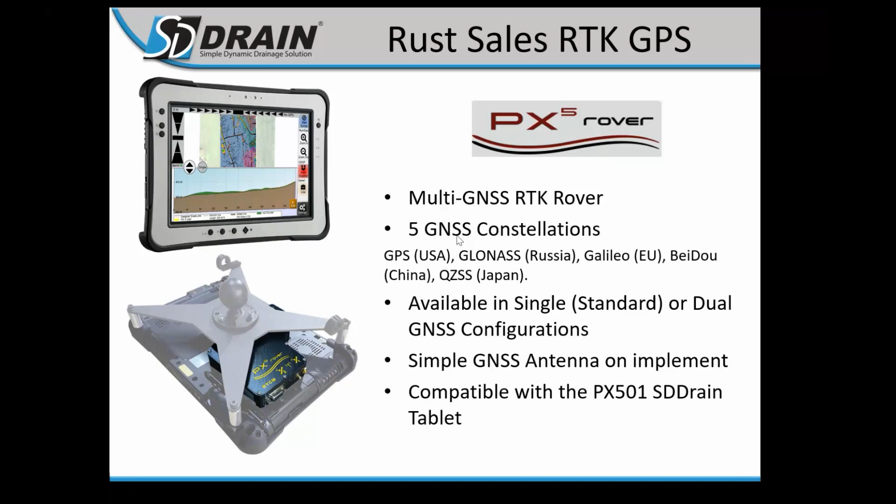And then it also comes with a Rust Sales base station, which would be a unit that you would bring with you to the field that you guys can set up just to ensure that you guys have the best GPS signal available to you. And this is unlocked for the life of the product. So there's no subscription fees when you guys are trying to get your RTK signal. So again, if you want to check it out, go ahead and ask your dealer. And it is the PX5 Rover and base.

Rust Sales support tools. We have manuals.rustsales.com and also sddrain.com. These are two websites that we have put together. There are support pages on each of them to help you guys if you need quick reference guides, cheat sheets, how to connect guides and stuff like that for connecting your equipment starting up. Or if you guys are new purchasers, there's lots of resources on here for configuring your globes, running cables, where to mount stuff, and things like that.

We also have remote support. This uses an internet hotspot if you guys have hotspots on your phones. So be sure to check that out. And it really helps us out if you guys can get your phones connected to your tablets. And then when you guys call in for support, we'll walk you through how to get us logged in. That way we can take a look at all of your different settings.

If you have questions on the program, if you're doing things right, again, we can log in and actually take a look and see exactly what's going on your screen. And we can actually click around and make changes without you having to touch the screen. So it's something that's been really helpful for us.

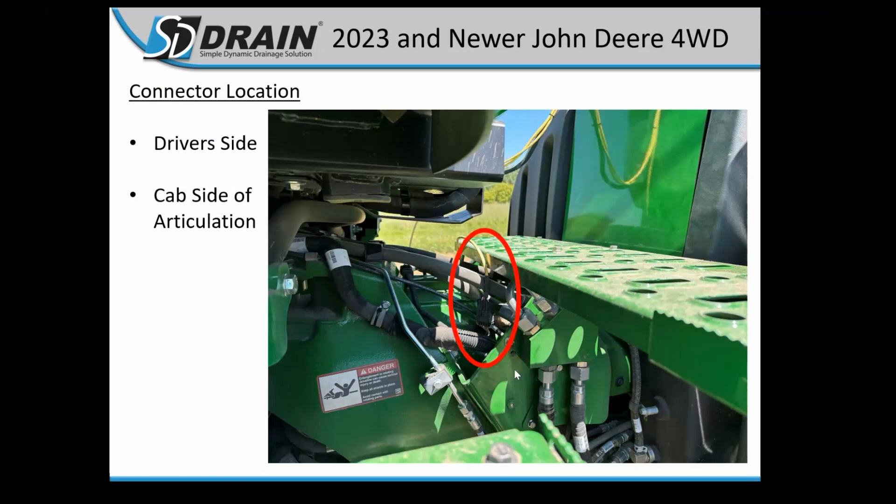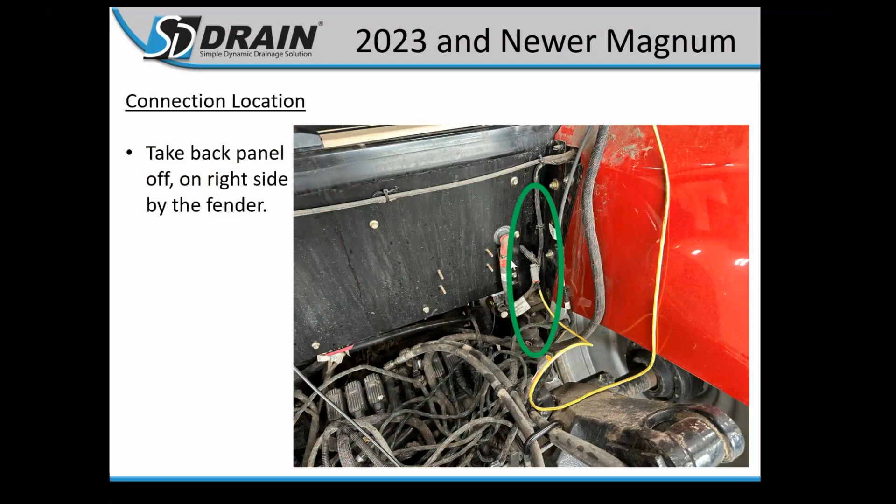2023 and newer Magnums, again, on the back of the tractor. So this would be more for guys pulling smaller plows, still being able to use those bigger horsepower front wheel assist tractors. Take the panel off on the back of the tractor, and you'll find this connector here on the right side. Notice they've taken all of the electronics out. So take that panel off, and you'll find that connector right about here.

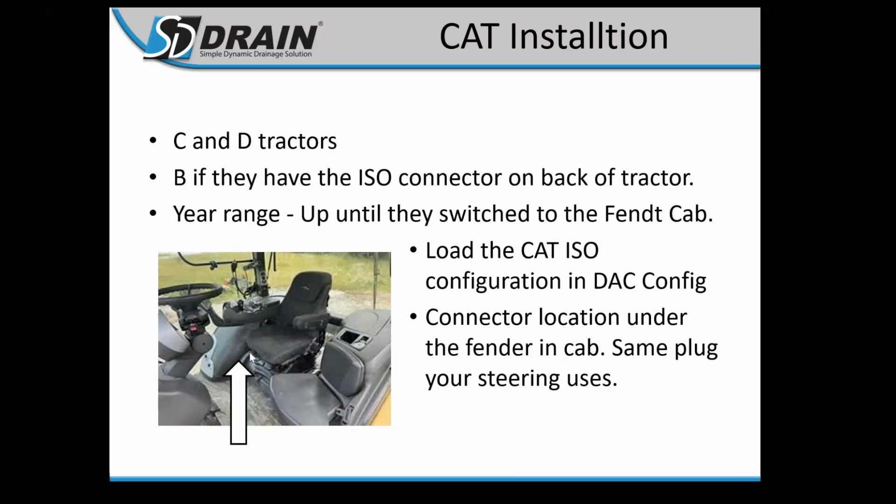Just a reminder too, when we're at this spot, there's the John Deere 7000s and the 7500s. We've heard that there have been dealers pushing the satellite RTK, but even on John Deere's website, you're not supposed to use that for tiling or for water management. So you'll need a base in the field in order to do that. So your 7000 and 7500 would need to have a radio on it, and then you would have a base in the field. But the settings would be the same for the John Deere GPS configuration as they are with the 3000 and the 6000. Yeah, that makes sense.

And another reason we've got a solution for that is you guys are losing your John Deere tower networks. Again, that PX5 rover that we talked about earlier is a good solution for you guys as a standalone kit for your ditching and in this case, tiling. That's just something to talk to your John Deere dealer about.

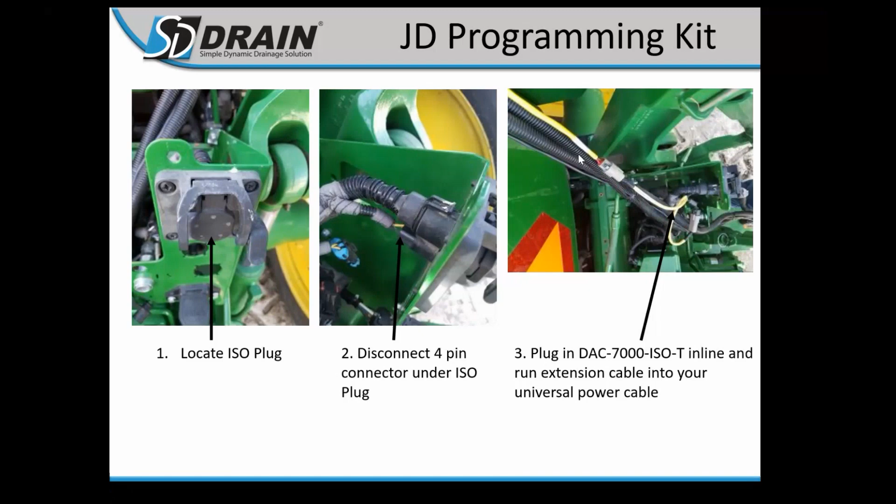Again, it plugs into the ISO plug on the back of the tractor, and an extension runs up into the cab and plugs into our main power harness. What you'll do is go on your 2630 or John Deere display, make the changes to your receiver, configuring your radio channel and network ID, and then you can go ahead and unplug that cable from our main harness. So it's a temporary connection while you're programming, and then disconnect it so that way you can use your steering.

You'll open up Ag Remote on your computer, hit File, go to Connect, and then honestly, the easiest thing to do is to follow the instructions that we give you on manuals.rustsales.com or SD Drain Support, and then go to the Support tab. It's a lot easier just to follow the cheat sheet page than it is to try and talk you through it in this seminar.

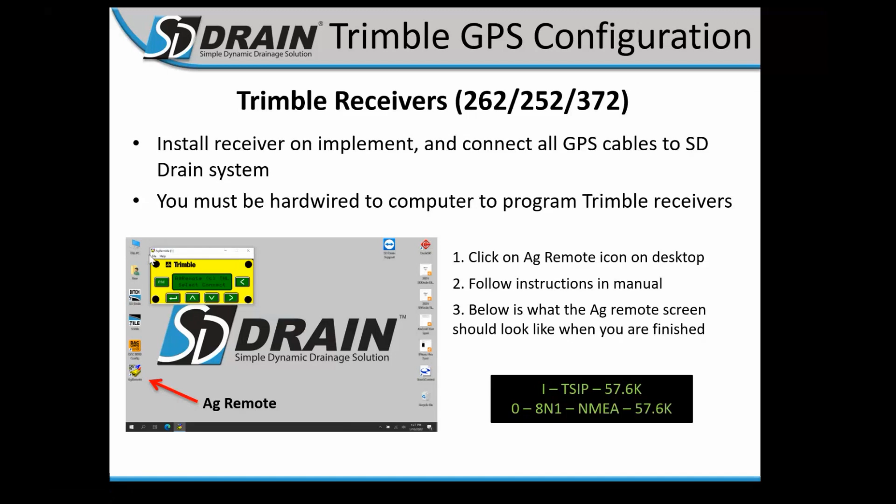Ag Leader 6500 and 7500 receivers. Again, these are a little bit like Trimble. You have to hardwire to our computer to configure them. There is a page that will show you exactly how to configure these globes. So for the 7500s, you can actually connect to them with your phone. And we need to do that so we can switch the baud rate. That way you can connect to it with our computer.

And the reasoning is these receivers default to a really high baud rate that is actually not readable on a serial connection. So we need to use your phone to switch that, and then we can connect to it on our computer. The 6500s, those you can actually connect to directly on the computer. So those you'll just hardwire and then follow. Again, the easiest way to program them is just to follow the instructions that we give you on our websites.

We'll go through how to find the instructions on the website a little bit later on in the presentation. Yeah, Scott's made some pretty cool cheat sheet guides and stuff like that that you guys can use.

So starting the program, we're actually going to go into SD Drain Tile. So double click into Tile. My desktop looks a little bit different; this is my training computer. So click agree. And then the first page that you guys are going to come to is going to be all of your file maintenance. So this is you guys keeping track of what field you're installing in. I've got grower, farm, and field on the left side. You've probably seen this in other software packages from different manufacturers, so hopefully it looks somewhat the same to you guys.

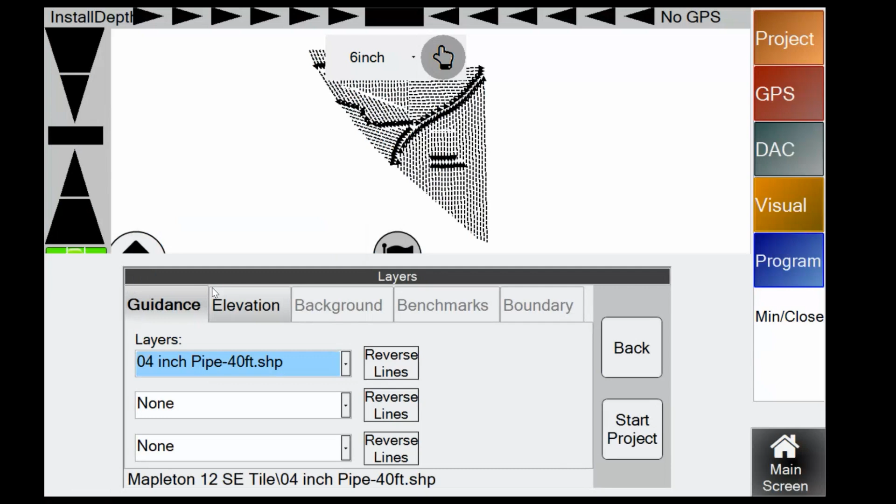I'm going to go to the elevation tab, and I'm just going to load the topo map for this. And then on my background, you get a whole ton of stuff here. We'll just do the flagging. So it kind of gives you some information on what's going on with each of those installation points. And then I'm going to hit start project.

There's errors here because I don't have certain things turned on. So give me a second here. I'm going to disconnect my GPS, and I'm also going to disconnect my controller, because it's searching for them. So that's why we're getting those errors.

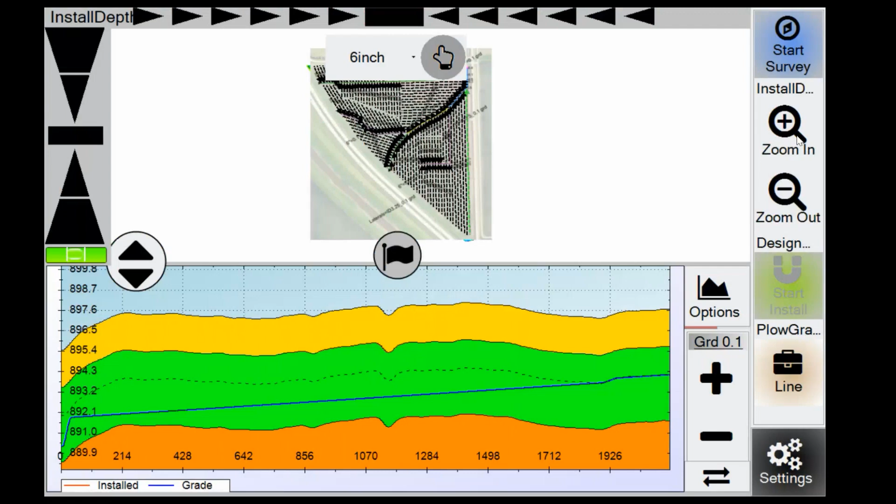So this is our overhead map. This is what tile looks like. If I zoom in here a little bit, you can see all of the different runs that are laid out in this tile project. So we're going to kind of go around the screen here, and I'm going to show you what buttons are. In the top right corner, we have Start Survey. This is the button you're going to press at the top of the run.

So you always survey from the top down towards the main, and then you always install going away from the main. So you kind of get in the loop once you guys start tiling. So Start Survey, drive to the main, hit Stop Survey, turn around, put the plow into the ground, then hit Start Install. This is your Start Install button. That's what's going to enable the screen to control your plow.

You're still going to have to most likely enable the tractor side. So for Case tractors, that's the 1-3 switch or those gray keypads. And then also for John Deere, it would be just clicking your number 1 SCV, depending on your plow. So number 1 SCV into detent to get it to go to auto. Or if you have a dual control plow, you would do number 1 and 3 to enable your hydraulics.

Above that, zoom in, zoom out. You guys saw that. It's pretty self-explanatory. Here's the options button. So we'll just kind of work around and go through the different buttons. I guess I skipped line. We'll go to line menu first. So if I click on line menu, this is just all the file management of every run. So it's going to be surveys, installs, and in this case, there's a G up here for guidance.

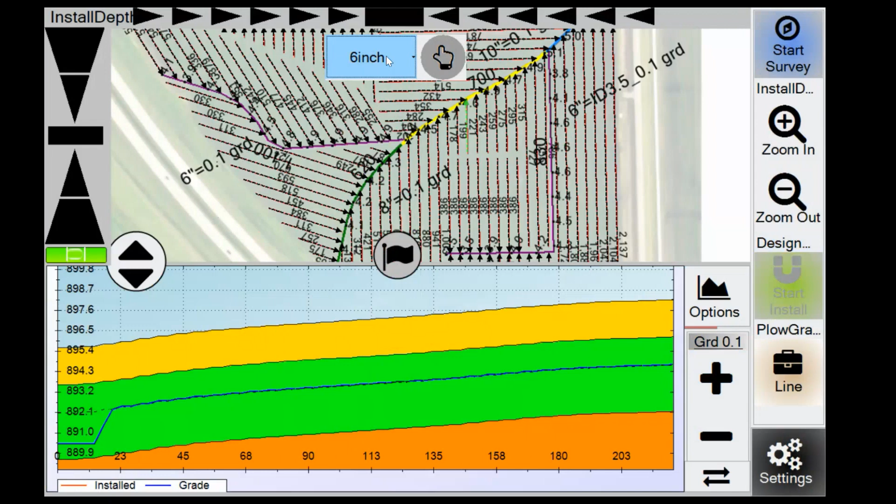What's cool is that when you're in the middle of a run, if you're changing tile sizes as the run is going on, you don't have to stop. All you'd have to do is click on that button and switch the tile size as you're still installing the tile. So that's a cool part about having that button right up in the center of the screen. And another thing too, if you want to move this around, this finger-looking hand here, you can grab it and drag it off to the side, just so it's not blocking your tractor icon or your plow icon on the screen.

So options, edit. So if you guys are wanting to change some parameters and it only associates to that run, you can go to the edit window, and now you can change your min grade, min depth, ideal depth, and max depth, all how you want it to be laid out. So if I change my ideal depth, you guys can see here how that changes my install.

I'll talk about the side profile. Let's just do it right now. So everything here in the side profile is all the information you need to know about where your tile is going to be installed and how it's going to be installed. So you can see here, the yellow is going to be your minimum depth. So this solid black line that separates the green and the yellow, that is your minimum depth, which is set in this case to 2 feet.

And then I've got green and orange where those two meet. That is going to be your max depth. So typically you'll set your max depth to the size of your plow. And then your ideal depth is going to be this dashed line that strikes through the green. That's going to be the point where you say, hey, I want to install tile at my ideal depth of, in this case, 3.8 feet. It's going to do its best to fit the line in at 3.8 feet.

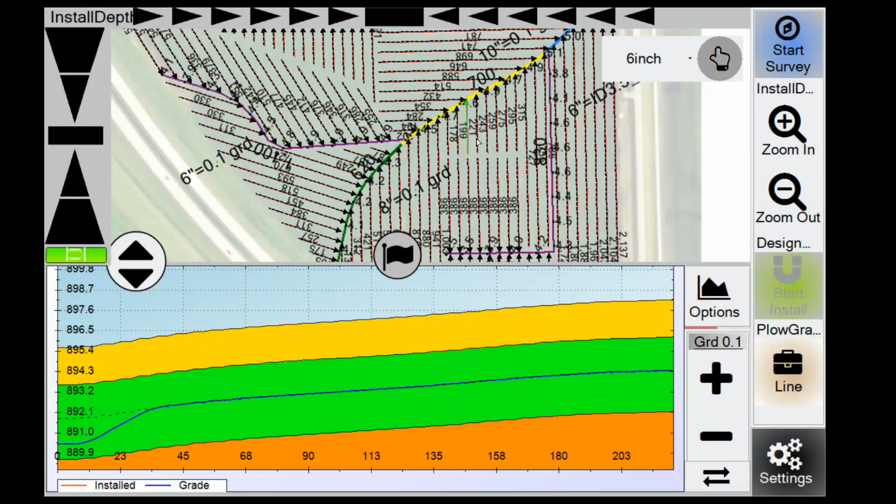And if you do a bunch of different surveying, you can change that run by simply tapping on the overhead map, just like I'm doing with my cursor here. You guys can see that. So that is the edit window. Some other things that you guys can see here, we've got graph lines that'll be displayed, target depth, install depth, and flags. That's just displaying the different things. So if you want to uncheck these and not display certain stuff, you can do that as well.

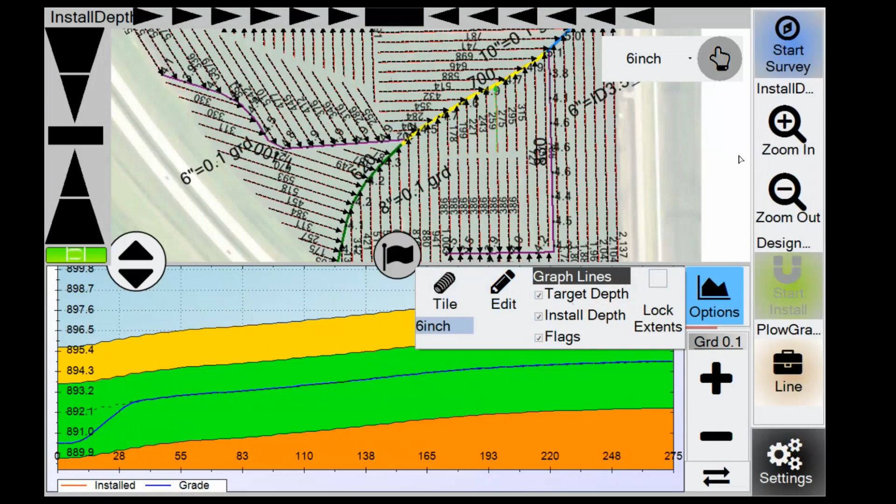And then lock extents. If you really want to zoom in and see how well that plow is controlling, you guys can check mark this lock extents and then zoom in. And what happens is, if you're really zoomed in, really close up to that tile run, the only thing that's going to be displayed on your side profile down here is the section that's displayed up on the overhead.

So you can see here, I just checked the lock extents button on. So as I zoom in, you can see that now my bottom map is changing. So as I was driving, it would just keep track of what's in view on the overhead. That is the options button.

Down below that, we have the grade change button. This is something that you guys can change as you are actually installing. So if you want to switch your grade on the fly as you're going, you guys can adjust that grade. Say you need to make up some depth or something along the way, or if you just know you want a certain section of that tile installed at a different grade, great. You guys can change that slope as you're operating by hitting the plus and minus buttons here.

Is that only changing the minimum grade? Correct. Yep. Good point, Scott. It's only changing the minimum grade. We're still going to do a best fit line to make that tile install nice and smoothly, but this will change the minimum grade of your run.

The arrows here, if you click on this, this is a pitch change button. So what it does is on Prairie plows, there's a slope sensor that is attached to those to monitor the pitch control of the plow.

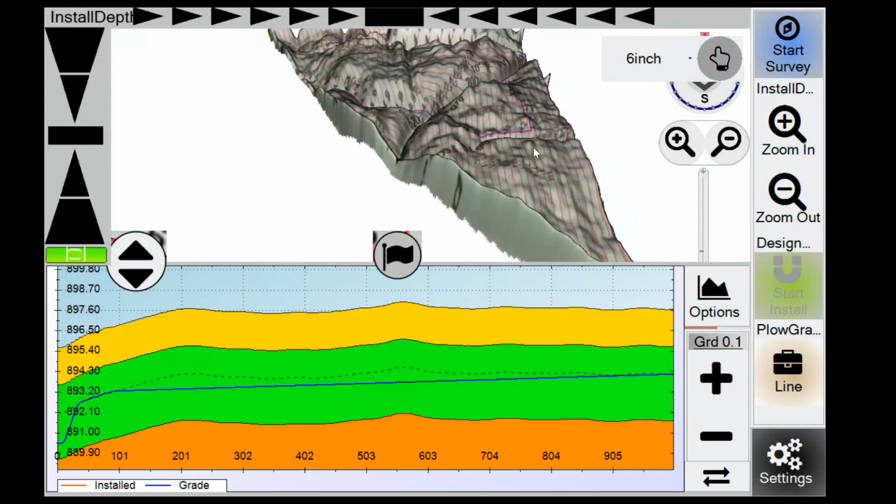So here I switched it to 3D mode. If I zoom in, zoom out, you guys can see now how the terrain changes. And I'm actually changing the way it's exaggerated with this bar on the right. So just again, to show you guys how cool things can be, or just the extra data you guys can get through getting these tile plans made.

And the thing with the 3D map is that's going to be displayed in a heads-up display. So the map is always going to rotate to be the direction that you're traveling. Whereas when we switch back over to the overhead view, it's always a north-up display.

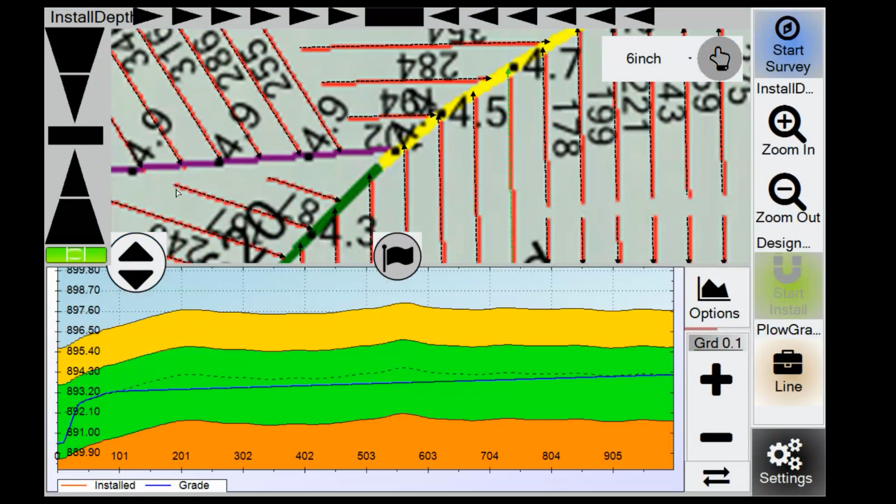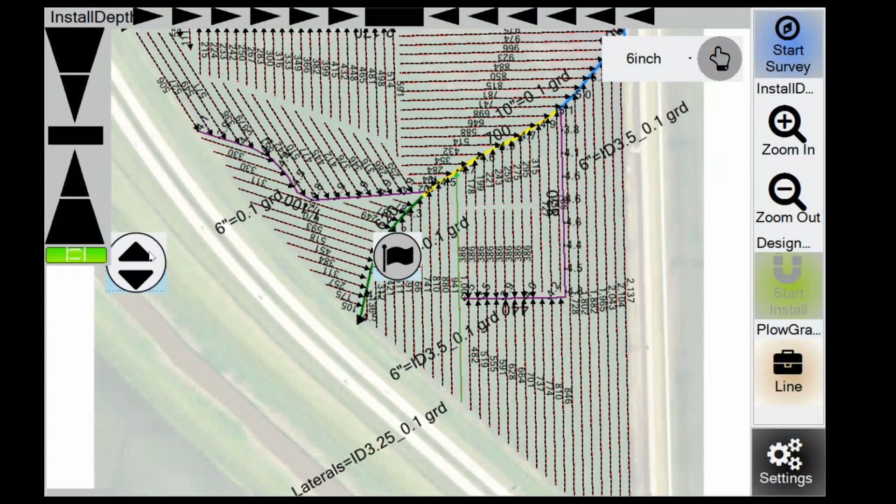So in the window button, the next thing we have is the side profile. And really, this is more for viewing. If you want to get rid of this, then you've got a big picture and you can look around and plan things that you want to do throughout the field. So again, that is the side profile, just to get rid of that. I'm going to bring our side profile back up here.

On the window button, once again, you can grab that window button and press and hold it, and then you can move it down or move it up, and that's going to change the window sizes from the overhead view to the side view.

Yeah, good point. And that's a quick, easy way. Instead of turning off your side profile, you can just slide this down quick, take a look, and slide it back up as you're operating.

So left side, there is also a bubble level. This is indicating for guys who run a slope sensor on their plow. Again, not all plows need it, but this is the slope indicator. So when you guys are trying to level your plow out in the start hole, this is a good indicator to use to tell if your plow is actually level. And actually, if you click on it, for me it's going to say no slope sensor attached or detected. I'm going to hit OK.

But normally, if everything is connected and working, if you click on this button, it's going to allow certain tractors to be able to level your plow into the ground. And as of right now, it's only going to be Case tractors and guys running external valves as well. Just because John Deere has a safety where you have to be moving for your external hydraulics to be able to be controlled. And other things like CAT as well have the same safety for movement. So click on it and it'll walk you through what to do. Make sure your plow's level or in the start hole, and then you press and hold OK to level. And I have a video to show you guys what that looks like.

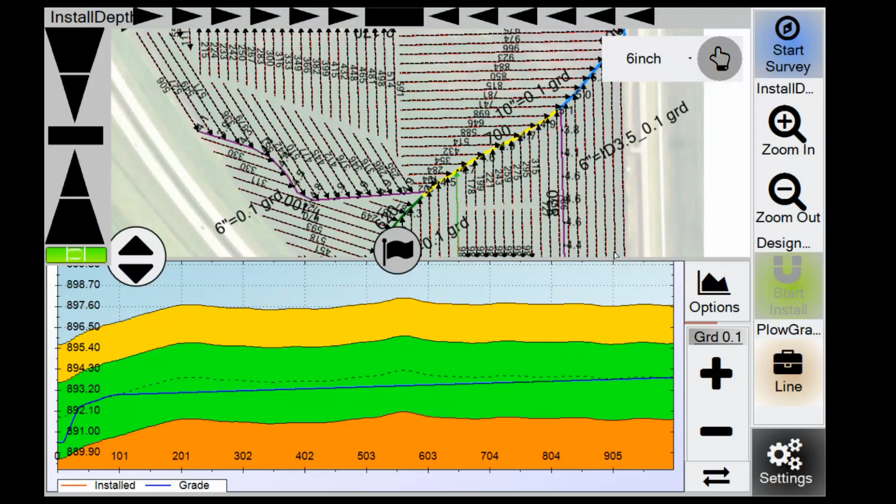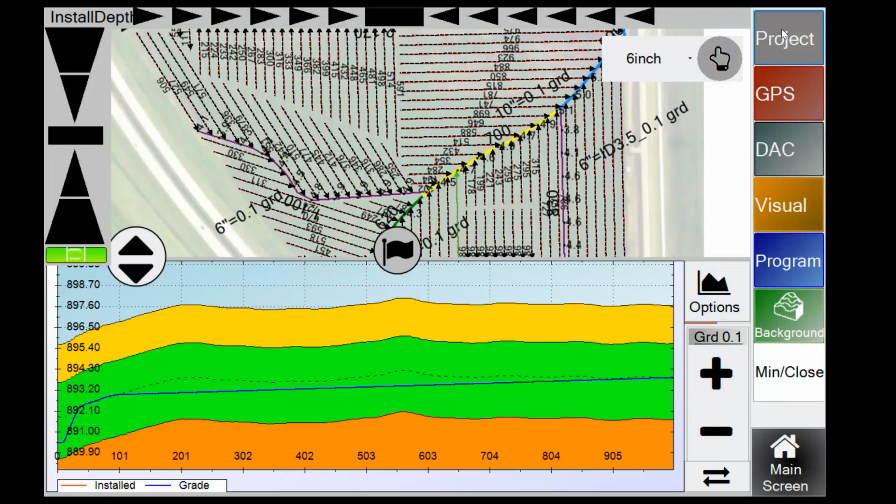Next, we're going to go to settings, and we're going to go through these. I'm not going to do everything because some of it isn't so much related to just everyday users. A lot more of it is troubleshooting that we would walk you through over the phone. So the first thing is project.

There's save load settings. If I click on this, it's going to bring me to a page where I can actually save the parameters for each plow. If I've got a couple plows that I run on my farm or in my operation, I can save those parameters, like all of your implement measurements, all of your install depth, stuff like that. You guys can save all of those in here and then quickly load them when you need to switch between those plows.

Next is going to be layers. So if you guys want to switch and add different layers when you're installing, in this case, if I wanted to get rid of my 4-inch pipe, I'm going to go none. So now you can see it's a blank screen, or the guidance lines have been removed. If I do my 10-inch pipe, you can see here it just added only my 10-inch pipe.

That way you can see exactly what needs to be installed and you can separate what's what, which works really nice. So if I want to get rid of that, or if I just want to switch it, I'll go 6-inch pipe. So now you can see that is the only 6-inch pipe that I need to install on this plan. We'll go back to the 4-inch just because it gives a nice picture. So that is the layers tab. We'll go start project again.

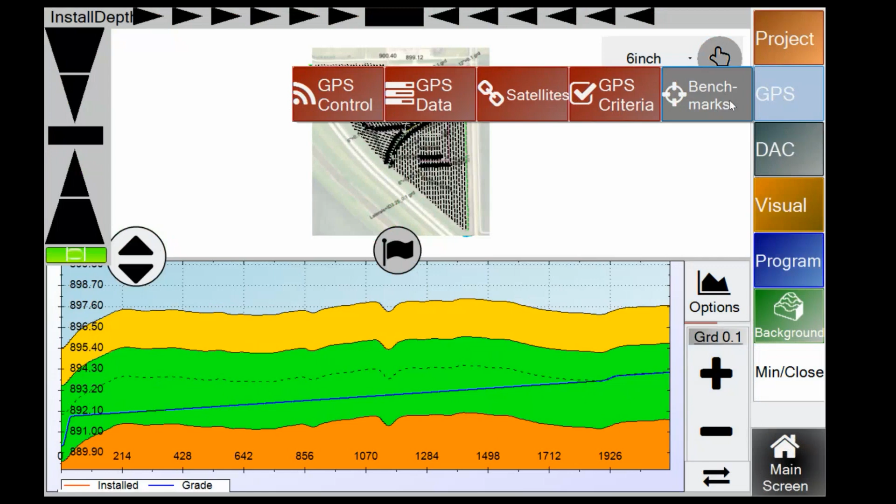Okay, so settings. The next one down is going to be GPS. Benchmarks is the first one on the list here. So we're going to click into benchmarks. When you guys start a tile plan, you kind of got to think about the future. So the best case is that every field will have a benchmark, and every field you'll be able to park in the same spot every single time to correct off this benchmark.

And a benchmark is just a spot in the field that doesn't get disturbed every time you do tillage, something that's going to be consistent year in and year out that you guys can use as a reference to correct your GPS. So go someplace in your field where that is consistent, click add new, and it's going to drop a benchmark where your plow is sitting. Again, like what Scott talked about, the GPS on your screen up here is where your plow is sitting and not your tractor.

So when you come back, I'll just give you the quick rundown on how to use your benchmarks. Let's say you're done for the day and you want to go home. You can park your tractor in this location, hit add new in this benchmarks tab. You're going to see this progress bar load, and then it will drop a benchmark, and you'll see it in the list here, but also on the overhead map.

I would park your tractor, just leave your tractor right there, do not move, and in the morning you'll come back, start everything up, get RTK GPS coming in, and then go to your GPS benchmarks tab, select that benchmark from the list, and then hit start correction.

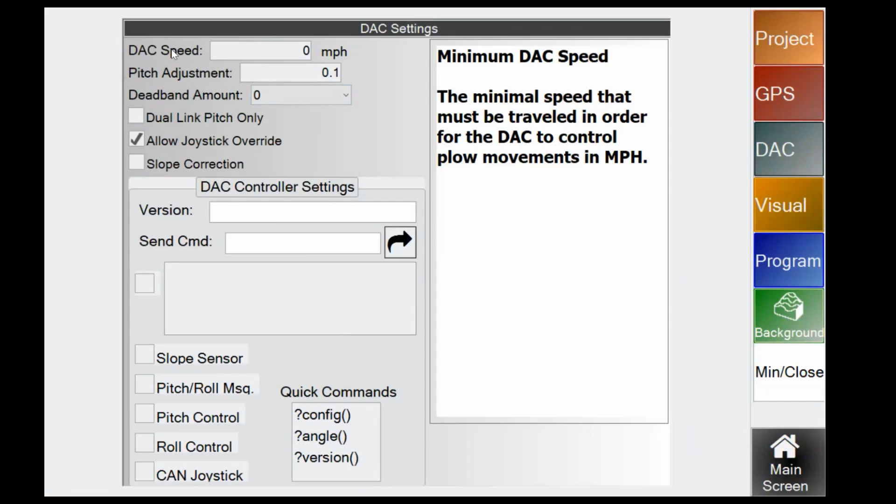Next portion is DAC. We've got DAC config. I'm going to go through that a little bit later. I'm going to go to DAC settings instead. So DAC speed, all these are going to be dependent on what type of plow you're running and what hardware you have to turn on. Starting at the top here, DAC speed, again, is just the minimal speed in order for us to control the plow.

Pitch adjustment: since your plow is running at a certain pitch through the ground, if you need to raise and lower the pitch at which it runs, you guys can change that here. Again, that's that same button that is down below in the arrows here. So this is the same pitch adjustment that you would be doing in DAC settings. And then deadband amount, we recommend changing this to 0. So if you guys haven't checked this out, switch this to 0.

Dual link pitch only is going to turn your Crary, and I use Crary as an example, into a pitch control plow. Where we see this used is in rough conditions, like extremely rough conditions. What you do is you actually float your elevation cylinders, and then you only use your pitch to control the depth that it installs. You have to check mark this on. So you'll float your main lift and then enable your pitch cylinders.

Allow joystick override. This is for guys running the external valve. When you guys click lift, or you click a button on the controller, it's going to shut control off and allow you to raise that plow out of the ground. Slope correction, you guys can just leave that unchecked. You won't need to worry about that one.

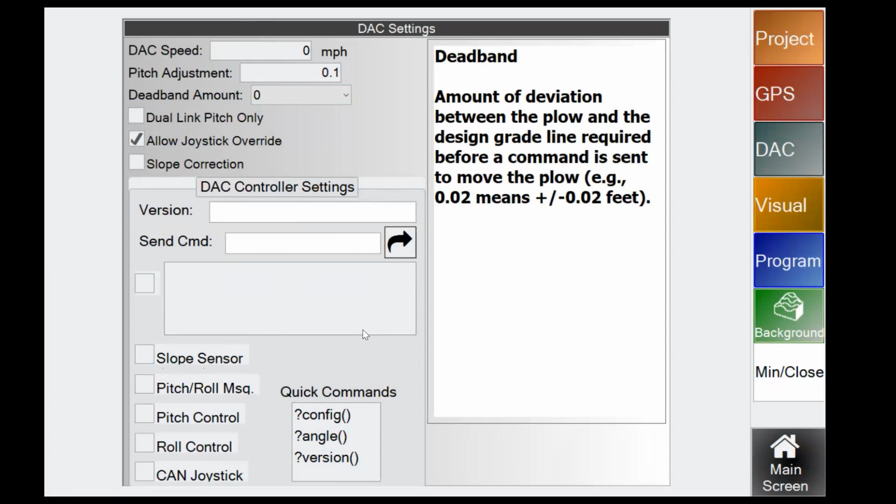DAC data, again, this is all related to the slope sensor that is connected to your machine. Again, if you don't have a slope sensor, like guys running Soil Max plows, we don't need them for those. You'll have a bunch of pitch and roll data coming in. DAC Control, for guys running a typical standard setup, again, you'll most likely be set up wireless.

If you have to hardwire the controller for some reason, and most of the time that's going to be in troubleshooting times or whatever you want to call them, where something is not working right, you guys can wire your controller as well. So there's a serial connection up here.

Next thing is going to be visual. So flagging and logging, check mark the show manual flags button like we talked about before, and then you guys can name what you want these flags to be labeled as. Down below that, we've got enable visual logging. If you check mark this on, what's going to happen is SD Drain is going to start recording all of the data for wherever you drive in that field.

And this is more of a data recording feature, as you can see here in the explanation on the right. It's more for guys if you want to survey that field and then get a tile plan or a topography map made. We use LiDAR. So if there's LiDAR in your area, most likely we will use that to create that tile map.

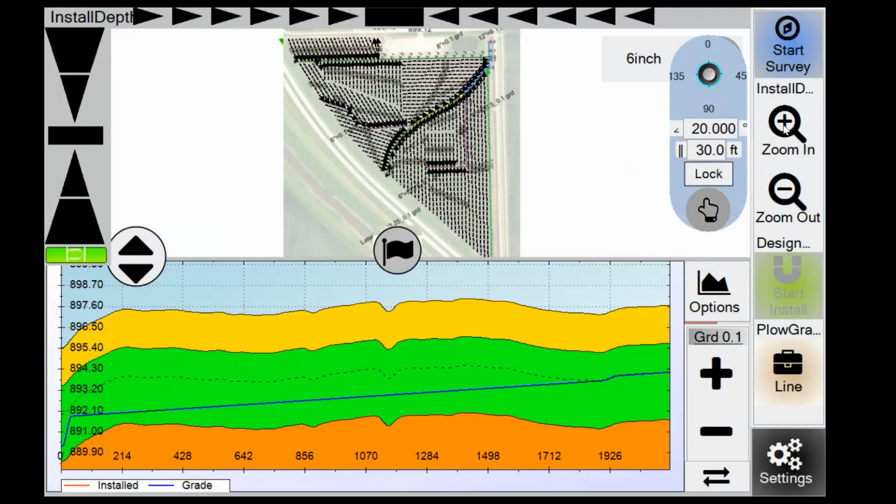laid out plan. And I'm going to kind of go off the path here. So we're going to use this open area as an example of where I might use this. So let's say I don't have a plan. I don't have any of this, but I know that I want to do some sort of pattern tile. What I can do is zoom in a little bit more.

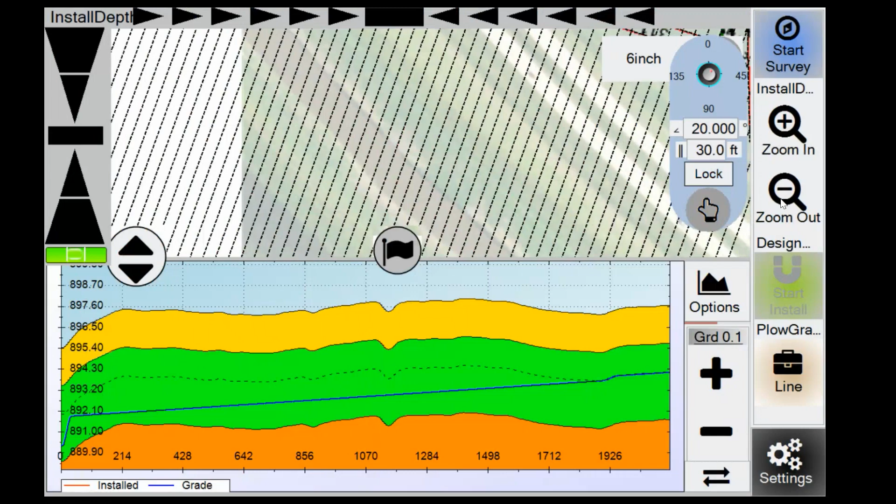So when you're zoomed in at the right zoom level, this will display all of your guidance lines, grid lines. Yeah, grid lines. Yep. So as you zoom out, those will actually go away and you'll get a better picture of your map.

But if you zoom in, you can see here now, I'm going to set this to, let's just go 90 degrees, hit enter, and then I'm going to do, let's do, I don't know, 25 foot spacing. So now those lines are a little bit tighter.

And actually, what you can do now, let's just say this line is not exactly where your cursor is sitting. Well, if you drag this thumb thing around, it will actually move those tile lines and you can more precisely place your grid lines. And now you can use this as guidance. So, well, not like auto steer guidance, but actually a visual that you guys can follow as you're driving.

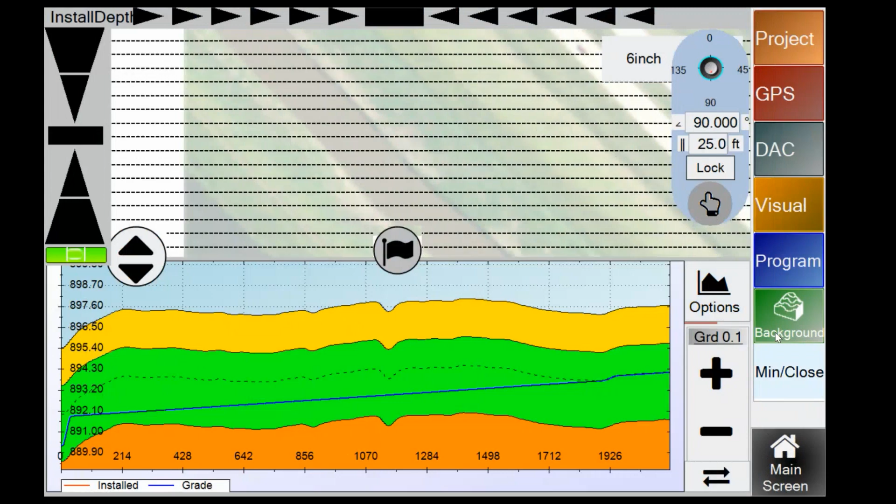And once you're happy with where those lines are showing up, hit this lock button right here, and it's going to make that menu a little bit smaller, and it will lock these lines where they're placed. Click the thumb to pop that window back up if you need to change anything. That is the Show Grid Lines button.

Next, we have the indicator bar, and this is talking about that left side indicator bar or the vertical indicator bar, and also the horizontal or the steering or guidance light bar. Don't change any of these values. That's all I got to say there. Don't change the auto level range, and then control and work screen, keep that checked.

Colorblind friendly option. This will change the red, green, and yellow indicator colors to a grayscale. So if you check mark this on, everything that indicates in color will just be a grayscale to make it hopefully easier for you to see.

Then we have graph. So here we've got, again, all dealing with colors. So here's the example below. If you don't like the way your min depth is laid out, you can switch this to red. So there now my min depth is going to be red, and so on. So however you want your map to be displayed, you guys can click through here and change the color scheme.

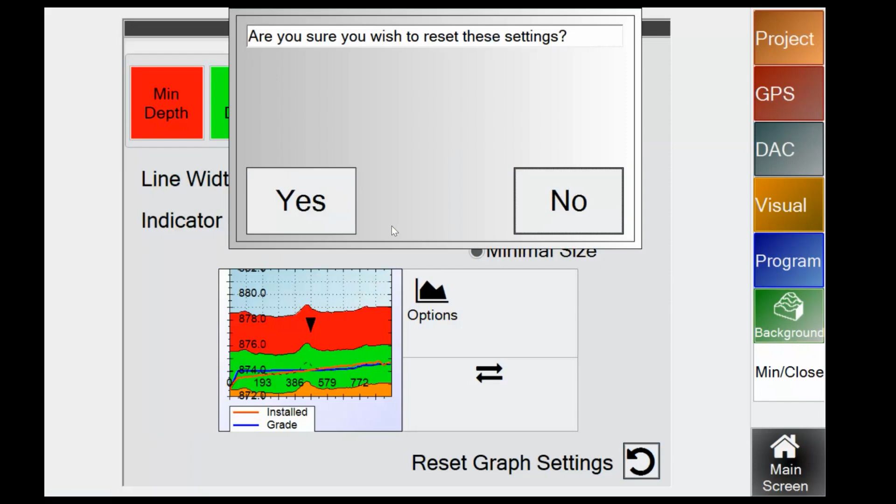Also lines, you want thicker install lines or indicator size on the bottom map, you guys can change that as well. I'm going to reset this back to defaults. So another nice thing is that if you ever screw something up, there's a reset to defaults button on most of the pages in SD Drain. And that is going to be this little circle right here, or the reset button on the bottom right.

Next, we have program, and we have export. We're just going to go through this here. So I'm actually going to show you a project that we can export. I have to open up a different project here, so give me a second.

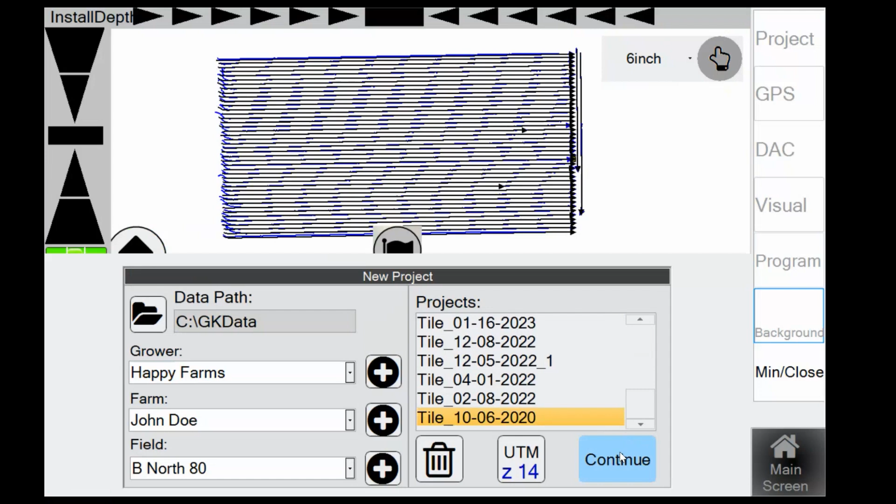So this would be an example of a project that is complete. And what I want to do is I want to print out all of my tile runs on a nice PDF for my records. So I'm going to hit continue. We'll just open that back up. I'm going to hit start project. And now I'm going to go to settings. I'm going to go to program and then export.

And then what we're going to do is click on report. This is the most common thing that guys will export. It is just a PDF report. And I'm going to hit OK on here. And what's going to happen is the program is going to go through a couple things, and then it will generate a PDF report that you guys can hand out to your customers or just to keep on the farm. Hit OK. And now it's going to open up.

So I actually created a PDF report here of this field before. So I'm going to click on this dated one here. So tile report. This is your PDF, B North 80 tile report. Double click that open. And now you're going to get a nice printable version of your field. We've got the grower, farm, field, the date that it was completed. And now if we scroll down, we've got a nice overhead view of what's going on.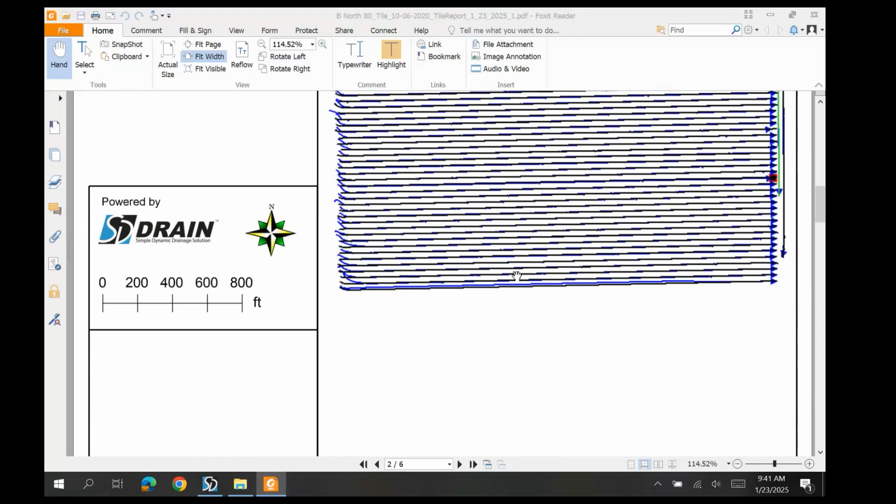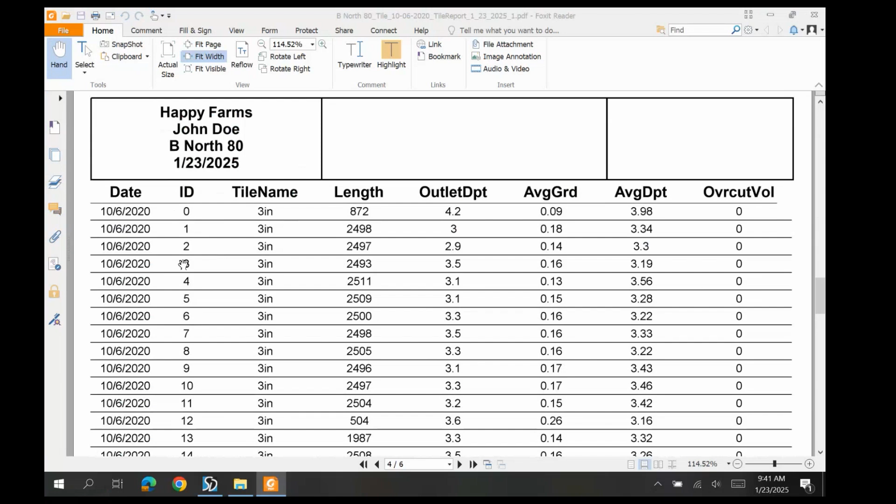Go down even further. Well, the date that the report was generated. Yes, correct. And then down below here, we can see a little bit more information. Our tile name, 3-inch length. We did 43,368 feet on 10.6, and on 10.7 we did more 3-inch, and we did 66,000 feet on that day. And then if you keep going down, you'll get more information about each run, and there's IDs associated with each run. You can see the length, the outlet depth, average grade, average depth, things like that.

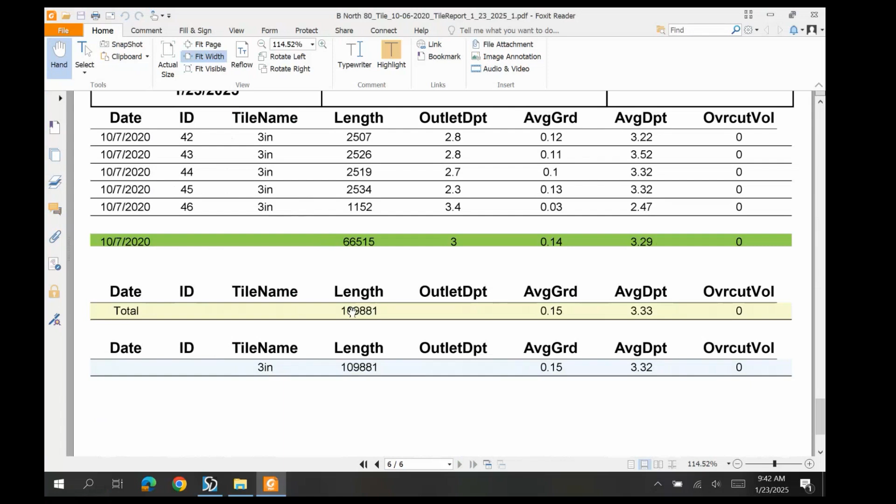So there's 10.6. Keep going. Here's 10.7. We did all these runs. So you can see we've got some longer runs in this project. And if you keep going down below, it just continues on and then shows you the total lengths of each tile size that you did. We only did 3-inch, so you're only going to see the 3-inch displayed.

So there is Tile exports as a PDF. The other option that you guys have is going to be export, and it's going to be the project. And there's something else, so you can actually overlay all of your runs on a Google Earth image. So if I go project, I'm just going to hit OK, and Tile's going to do its thing to generate or to export all of these different files.

So now you can see here we've got an export, so it'll pop up an exports folder. And now inside here we've got what are called install tile layers. So this is a KML file that will actually open up into Google Earth. So if you double click on this, it's going to open up Google Earth if it is installed on your computer, and it will actually just lay all of those tile runs on the globe or on your map here.

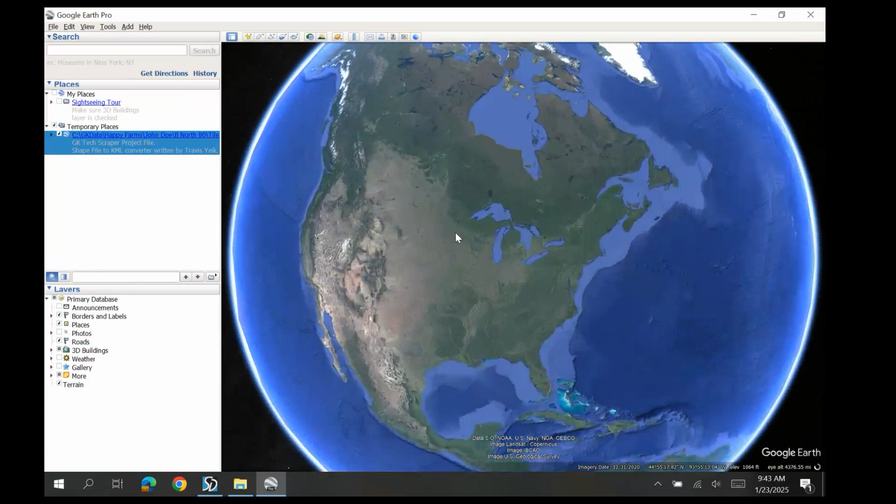So now you can see in this project, we've got all of our tile runs, and there's some tools, and you'll have to go through this and change the things and move it how you want to see, but I can zoom in, move the map, and stuff like that. But this is all Google Earth stuff that you guys can do. I believe you can print it off too. There's a print button up on top here.

If I click print, now it will actually let me label it, and then I can just print out this whole map for my records. And you can move this map around and get it however you want it to be in your printout. You guys can move that. So save it as a PDF or print.

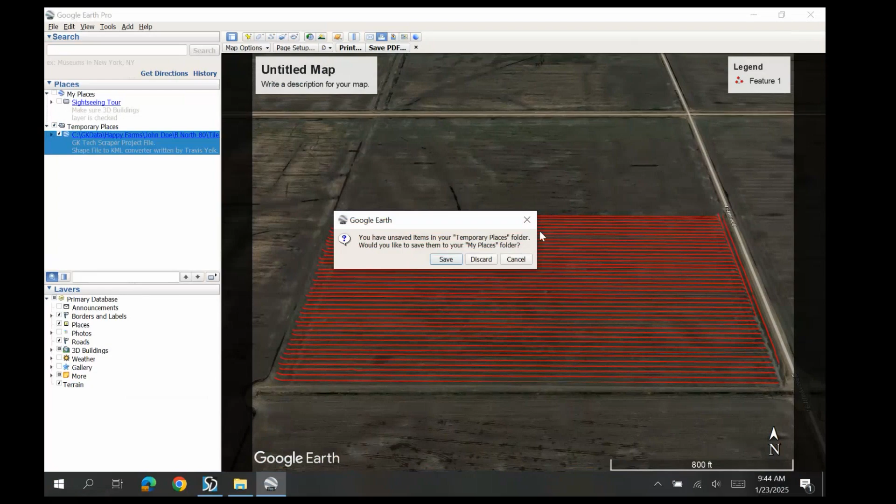I'm going to close Google Earth. I'm just going to discard it because I don't want to save this. Then close this as well. So I'm going to get back into my other project here. Then I'm going to hit continue.

So program support is going to be the next tab over. Again, this is when you guys need online help or us to log in. So if there's an issue with the program, it's usually easiest for us to just take a look exactly at what's going on. Go to this page, hit online help. And it's going to bring up a TeamViewer window that'll have an ID and a password for us as long as you are connected to internet. That's the main thing. So get this computer connected to your hotspot or an access point, and then we'll be able to support you better by actually logging in to your screen.

Check for updates. I should go over that. This button is for updating each year when you guys update your Tile programs. Connect it to internet, click check for updates, and it will get you the most recent version of Tile that has been released to the public. This number on my computer, you probably won't get this one just because I've got other versions, but just click check for updates and it'll get you the most recent.

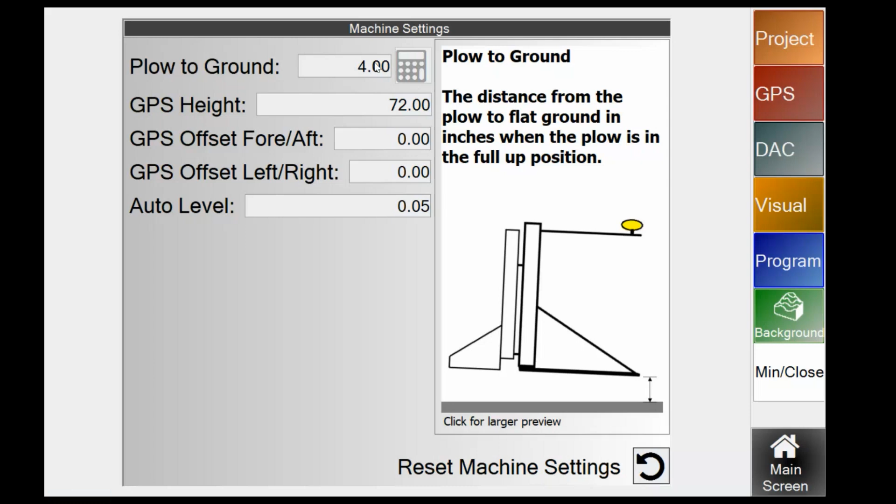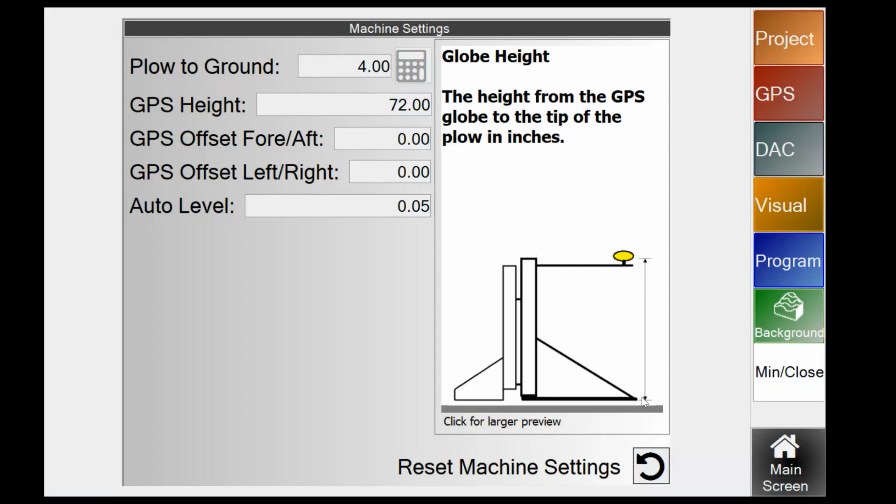Most of the time, like prairie plows, most plows are going to be anywhere between 5 inches and 10 inches off the ground for this plow to ground. GPS height, measure that in. It shows you exactly where to measure. So from the globe down to the tip of the plow. I usually drop the plow on the ground and then start doing all my measurements. That way, if you're alone, you're not trying to get the tape measure to be exactly on the plow. You can just throw it down to the ground and take your measurement.

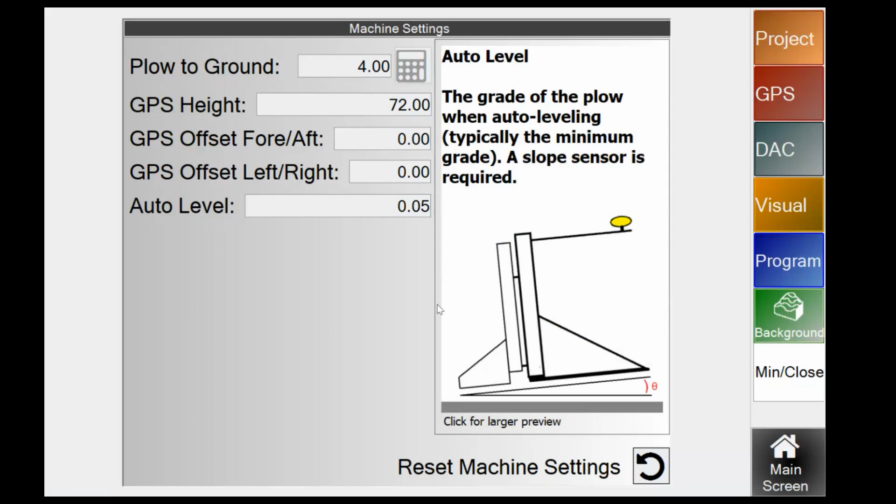Fore, aft, left and right. So how far is this globe in front or behind the tip of the plow? Here's the left and right. So how far is it to the left and right of the center of the plow where the tile gets installed? And then auto level. This is the degree or the grade that the plow is going to be leveled to when you guys are using that auto level feature.

Next is profile. And these are going to be all of your main settings. So this is where, or where and how, I should say, the tile is going to be installed in the ground. So min grade is going to be the absolute minimum slope installed on the tile. And then you've also got some other things in here like minimum depth. Again, click on it. It'll give you a nice picture. This is to the top of tile when you're setting this setting. So be sure that it is the top of tile, not the bottom.

Maximum depth is going to be to the bottom of tile at the maximum depth your plow can go. And then the ideal depth is going to be to bottom of tile throughout that green area where that tile is going to be installed to. So be sure to adjust this when you guys are switching between, say, a 4-inch tile and a 10-inch tile, because if you install your 10-inch at a 4-inch ideal depth, you're most likely not going to be happy. So just make sure that you guys check this page out when you're switching between tile sizes.

Max start distance. Yeah, I mean, that's going to automatically change depending on what tile you're putting in, right? If you're putting in like a 10-inch tile, it's going to use that calculation for where it's going in. I'm just saying, if you're putting in 10-inch tile, don't have a 4-inch tile selected. Correct. Yes, exactly. If you're putting in 10-inch tile, make sure that you have selected the right tile. And he's talking about this here. Where you're actually putting the tile in the ground could be at a different spot. Correct.

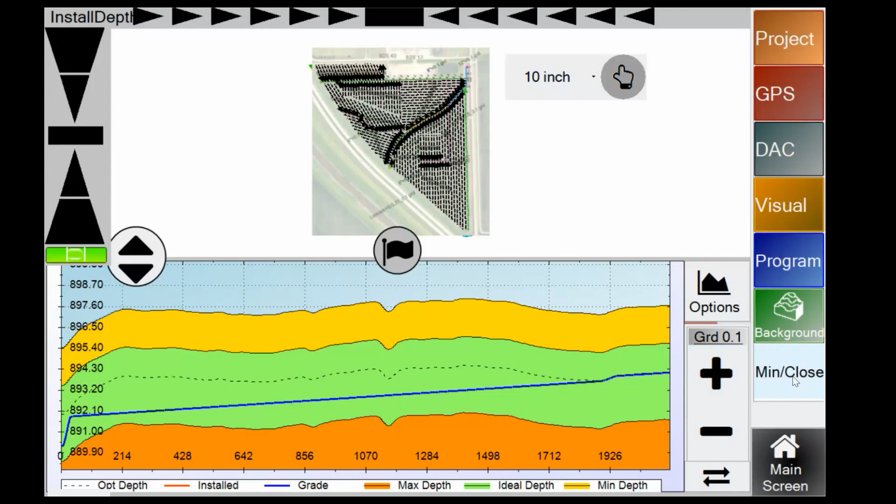And the thing too is, yes, select 10-inch here, and then also change all of your parameters according to your 10-inch tile. And most of the time, if you guys get a plan made by an agronomist or somebody else, they will hopefully give you all of this data because they have to have all that data when they build your tile design.

Max start distance is going to be the distance that we will auto generate a side profile and let you guys connect to your survey. So what happens is when guys survey up to their start hole, the plow, which is your point of survey, doesn't get all the way to your start hole.

So we allow whatever this value is, up to 50 feet, to auto generate a side profile. When you turn that tractor around, you're going past your point of survey, which we don't have survey data there. What we're going to do is auto generate a side profile to connect your start hole up to your survey.

Max elevation variance. This is the rock hit function. All it's saying is that if your plow deviates more than, in this case, a tenth from your design, it's going to throw a red flag or a yellow. So red means it went up in elevation, and yellow means it went down in elevation.

And this rock hit function is, so let's say we hit a rock, a red flag is thrown, your plow jumps up. We don't go back down to the initial grade. We will redesign the run as long as it doesn't violate any of your minimum depths and stuff like that. We'll just bump your install depth up a little bit so that way you can keep going.

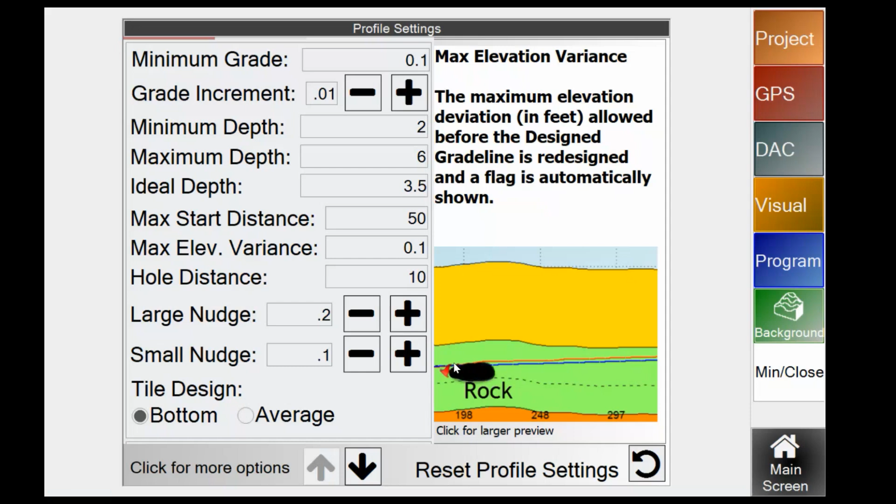Hole distance is going to be a starting depth when you guys are in your start hole. So this is an example of a run. Here is my start hole down at the bottom. So what my hole distance is doing is it is installing at a minimum grade for X amount of feet. In this case, it's 10 feet.

So for 10 feet, we are at minimum grade, and then we will start transitioning up in what's called our start flex distance, which is on this page. You can see our start flex distance right here. In most cases, I usually tell guys to set this to anywhere from like 20 to 30 feet. That's usually a decent transition. And it's all dependent on your guys' side profiles.

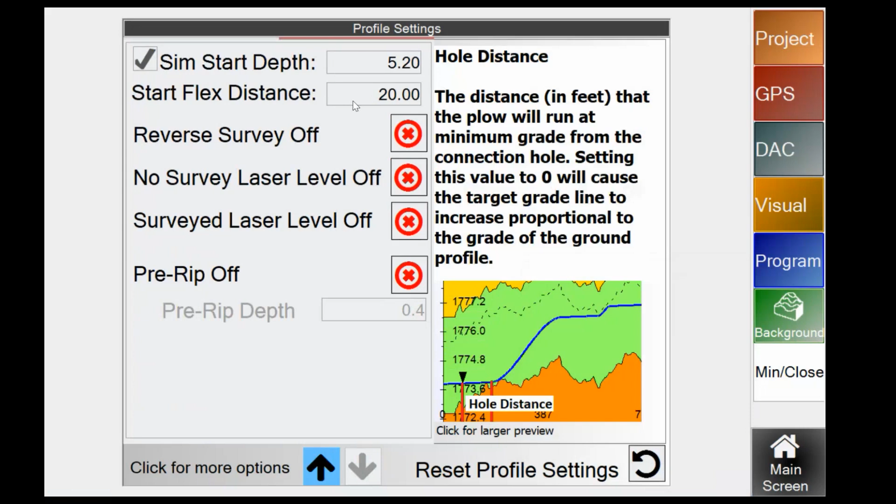And then for this hole distance, I would set this honestly to 0. It does transition very well if you just set your start flex distance to like 20 to 30 feet, at least where we tile, which is in the flatlands of North Dakota. So this is all up to you. Make sure, if you change these settings, you know exactly what is going on. And I have a slide to show you the differences too on how those values change your install.

Large nudge and small nudge. Remember, this is those arrows on the left side of the screen, the up and down. Large nudge is set to 0.2. Small nudge is set to 1/10. Yeah, just like those arrows. So there's the top arrow and the bottom arrow, and the top arrow is divided into 2 sections. The big nudge would be the upper, larger portion, and the bottom one would be the triangle that's closer to the on grade indicator.

Correct. Yep. And you guys can change those. It's kind of up to you. If you change this to 4 inches, the program's not just going to instantly bring the plow up. It'll transition that run gradually. But I would recommend leaving them at small enough numbers where if you accidentally bump them, it's not going to greatly affect your run.

Bottom allows more so for rock hits and issues to happen. Average is more of a, okay, I want it to be here and nowhere else. It needs to go in at this depth.

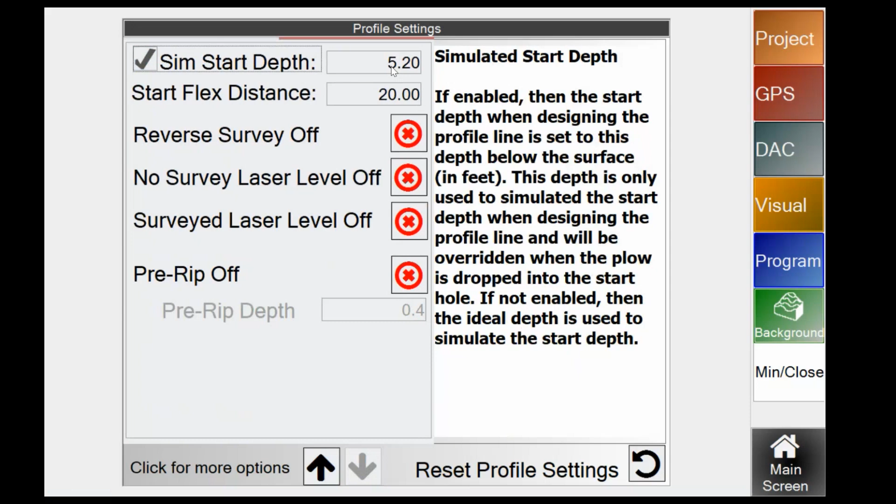We have simulated start depth. What this does is if you check this on, it is going to simulate the starting run at whatever value you have in here. So whenever I do my survey, if I have 5.2 feet set in here, it's going to simulate my plow dropping into the hole at 5.2 feet, even if my ideal depth is set to 3 feet. That way, if you're doing just individual surveys of different runs, you can see what that run will look like without having to dig a starter hole and actually put the plow into the ground.

Start flex distance. This is set to 20 feet. We already kind of talked about what this does. So hole distance is down here, and then that transitions into start flex distance up to your projected run or your ideal depth.

Reverse survey. This is for guys, I've seen some quad tracks that they actually survey in reverse. It works. So if you like to survey in reverse, go ahead and turn reverse survey on. But it mostly applies to commercial plows, I would say. Turn this on, and it'll keep track of where your GPS is mounted, left and right, fore and aft of the tip of your plow, it'll keep track of where all that is located.

No survey laser level. This function is for guys who want to drop their plow into the ground and just hit start install at a certain grade. They don't care about depths. They just want it in at a certain grade. This is more what I would think of as yard type stuff, not necessarily field stuff. No survey laser: you drop the plow to the ground, set your grade, and hit start install.

You won't get a side profile on the bottom. It will just show an install line. There'll be no depths because there is no survey, but it will install at a certain grade wherever you put that plow into the ground, at a laser function, I should say. So it's a laser install. It's like using a laser. So yeah, no survey laser level. Just check that on to use it.

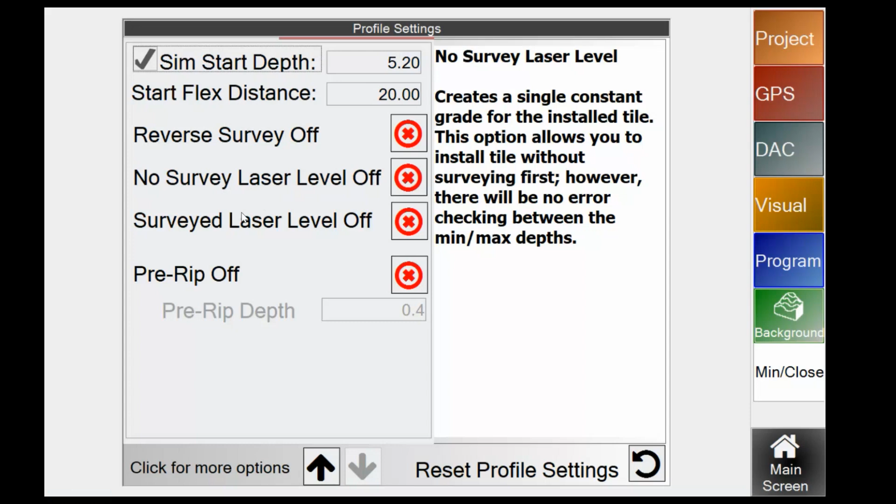And then there's surveyed laser level. So you'll still run your survey, turn around, put the plow into the ground, set what grade you want, and it will install it like a laser shot. You can still go around curves and stuff like that because this is a GPS system. And even if you didn't have a survey, it would still let you install like a laser around curves in your field.

Pre-rip function. When this is enabled, it'll ask you when you hit start install, are you installing tile or are you pre-ripping? And I'll show you a video of how this works. But essentially, you'll set your pre-rip depth, as you can see in the picture here, and that is the value above your install depth. So you hit start install, it's going to ask you, are you doing a pre-rip or installing tile? And if you click pre-rip, right away when you start moving, it is going to raise the plow up that desired pre-rip depth and then pre-rip that whole run as you go. And I'll show you how to use pre-rip in a little bit.

Back to main screen. I should note that this button in the bottom right corner, settings and main screen, only goes to two different locations. So if you're ever lost clicking settings or trying to do something and don't know where to go, just remember settings will only bring you to two different locations.

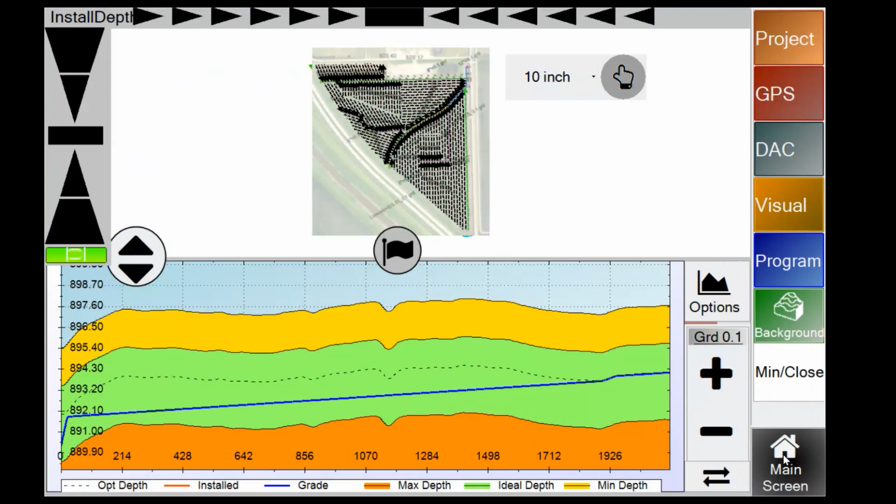This background selector button will select between the two different maps that you have available on display. So you can see here elevation, which is associated with the elevation map that you loaded. And then background is obviously your background image that you loaded.

Min close is going to be the button that you select to shut off for the day. Make sure you use this button. So click min close and do a shutdown. That's going to shut your computer down and also shut down SD Drain. If you just do a close, it will only shut down SD Drain. And if you do a minimize, it will just minimize the window and you can pop it back up.

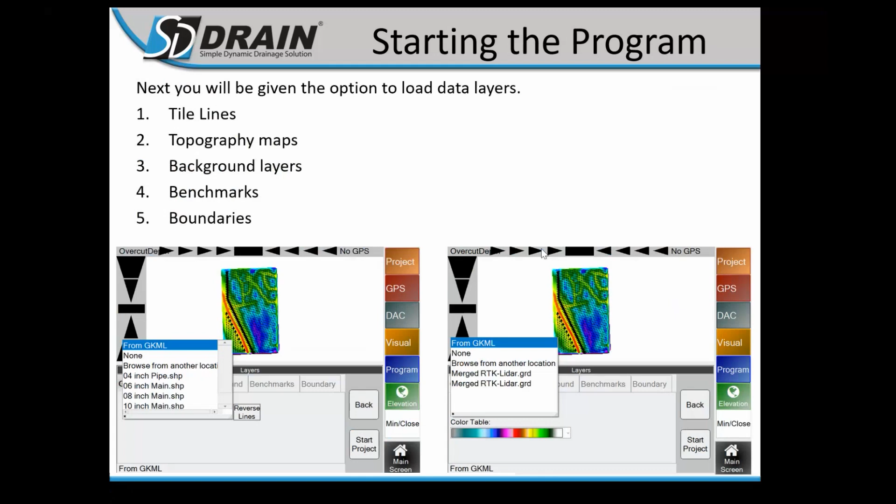All right, next we're going to move over to the slides, and we're going to go through some stuff in the PowerPoint. So starting the program, again, we've kind of covered this already, so it might not be as in depth, but we will still go through what we have here on the slides. So starting the program, again, remember this is where you guys will load your tile lines, which would be your guidance lines, topography maps, backgrounds, benchmarks, and stuff like that. Right, this is right after the grower farm field.

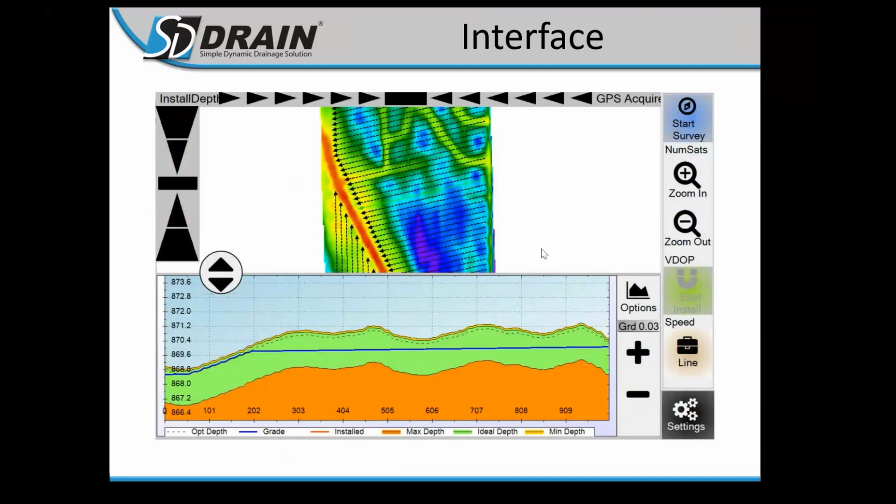All right, this next page is going to be your interface. So we went through a lot of what the buttons do. There's some stuff we didn't cover quite yet, but I've got a slide showing you guys a little bit more about the interface later. But this is your basic side profile on the bottom. You've got the overhead map up on top, and you guys can see the tile runs and so on. So this is your main interface that you guys will be working with when you guys are actually installing tile.

The survey buttons, we went through start survey, or I mentioned start survey and stop survey, but we also have pause survey and resume survey. Start and stop, pretty self-explanatory. Pause survey and resume are going to be used if you guys are trying to install pipe through something, I guess is the example I give. So you'll pause survey on one side of that obstacle, drive around it, and then hit resume.

And I guess a road would probably be a good example for guys trying to run a pipe through a road. You probably wouldn't drive right through that. So pause survey and resume. And then at the end of the run, you would still hit stop survey.

Again, side profile, you've got your grade change button here, options button, all your different colors of what your min depth, maximum depth, and then ideal depth would be dashed line and then anywhere in the green. So saying ideally I want it here.

We've got an overcut warning. So when you guys survey, you might get this red here in your side profile. Well, what this is indicating is that you're in a super deep area and you need to remove dirt or get a bigger plow. So most cases, you're probably just going to go get the scraper and remove this dirt. That way the run will work. And you can actually drive with your plow and mark out where this overcut starts.

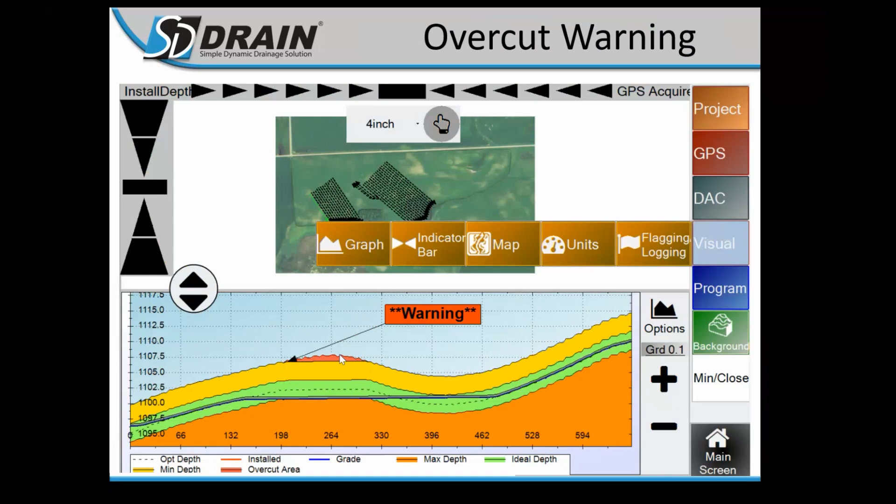Auto level. So what happens here is, again, like we said, it only works with vehicles that allow automatic movement while stationary. Again, Case tractors, and then our external valve. So you'll click on the bubble level and then click and hold the hold to level button. You'll see this bubble move from the left side. So this bubble indicates that it's pitched down right now.

So this is the front of the plow. This is the back of the plow. So pitched down. So as we level this, the bubble will move to the center, just like a construction level works. We've got our bubble indicator.

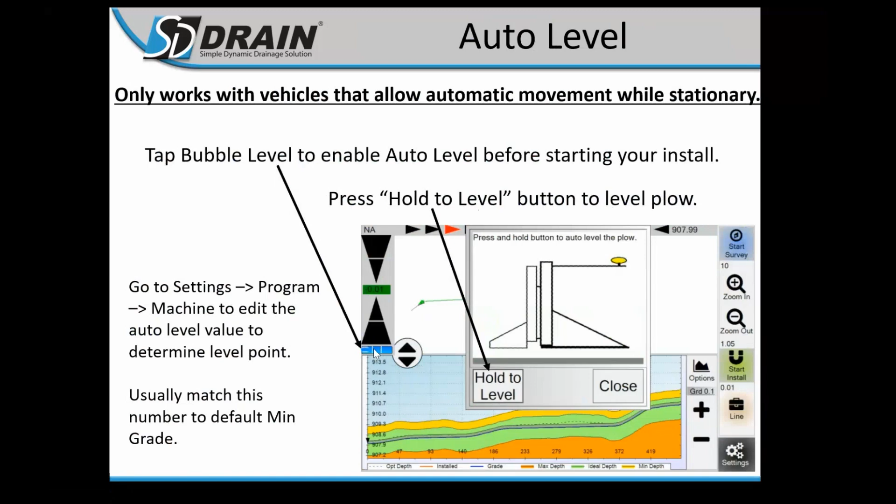Pre-rip: make sure that pre-rip is checked on, set your pre-rip depth, and then go on and use the function. So I think the video is next. Yeah, so here we've got a video showing how pre-rip works. So what's going to happen, I've already surveyed. I'm dropping my plow into the ground to set my start hole. And this is a typical run, or an example of one.

I'm next going to hit the bubble level. I'm going to hold this to level my plow. You'll see the bubble move to center. Then I'm going to hit close. And now I'm going to hit start install. Then I'm going to select pre-rip.

And you'll see right away, as soon as I start moving, my plow is going to lift up. So watch my indicator here. I start to move, my plow lifts up. And now as I run, I am pre-ripping my desired pre-rip above my install depth.

And guys would use this if you're in a harder soil condition. Rather than hooking the dozer or the tractor up to the front of your plow and pulling them through, the pre-rip is going to allow you to break up part of that soil in order to install. Then you're not cutting as much the second time when you're putting the tile actually in the ground. Yeah, you'll get a bigger loose portion of that dirt profile to work with.

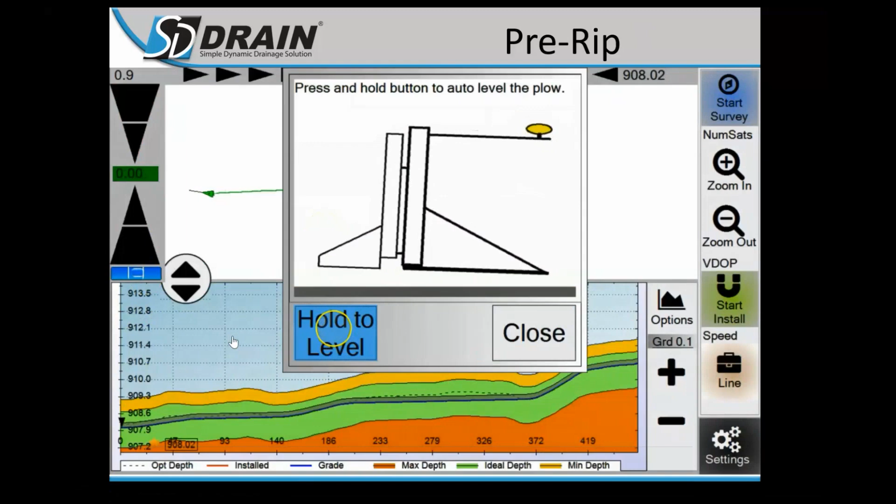So this will drop down. I'm going to match that to 908.02 or about. You don't have to be exact, but we'll get it there. I'm going to level my plow again. Hold to level. It's going to 0. And then I'm going to hit start install.

And this time I'm going to install tile. Check that your hydraulics are engaged. So this would be your 1-3 switch on Case tractors, or your 1 and 3 hydraulic on John Deere. And then you would start your run.

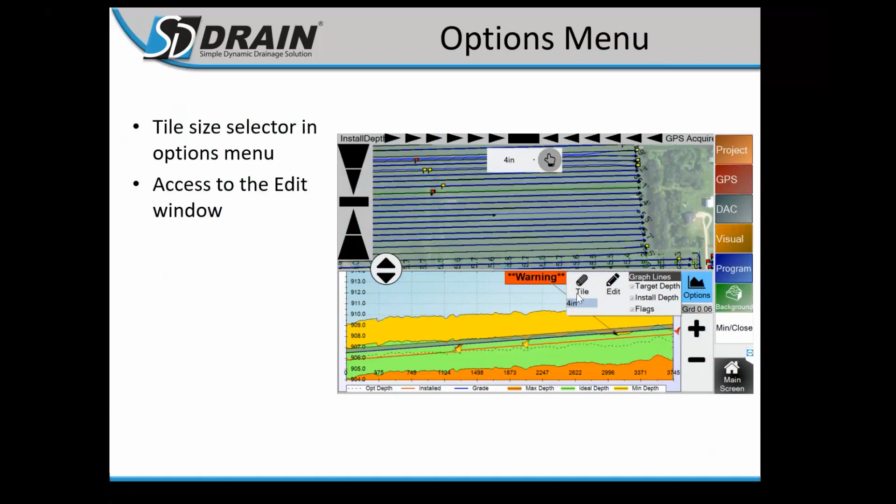Options menu, we went over this a little bit. We've got options, edit, tile. Again, we went through this a little bit earlier, so just some things to show you here. Edit feature: this is for editing the way that your tile is going to install in the ground. And I'm just going to cover it with these two pictures here.

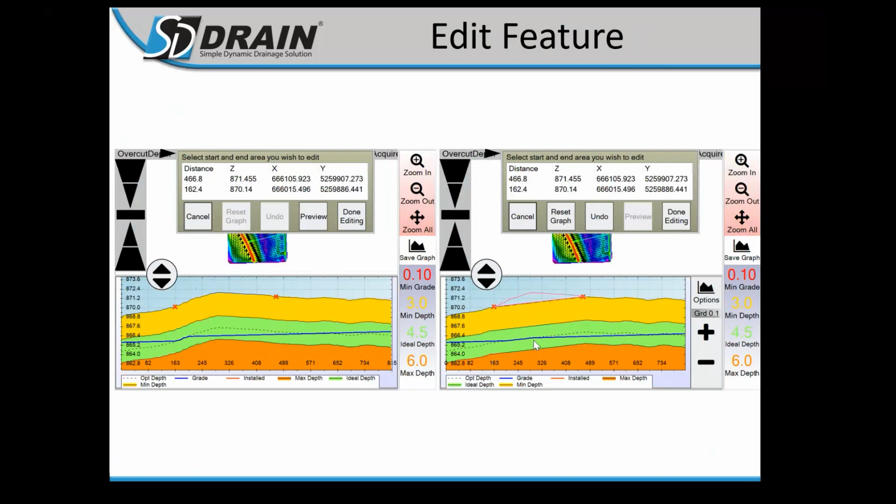Edit depth. This hasn't been fully added yet. It doesn't work in all situations, but the gist of it is, you have your survey. You'll go to the edit window. You'll place a single X, then you'll click on the edit depth, and you can tell it that at this spot I want it to be 4 foot deep. So it needs to be 4 foot deep at 145 feet into the install, and then it can go wherever it wants or back up to my ideal depth. So this feature isn't fully in there yet, so if it doesn't work quite how you want it to, just know that.

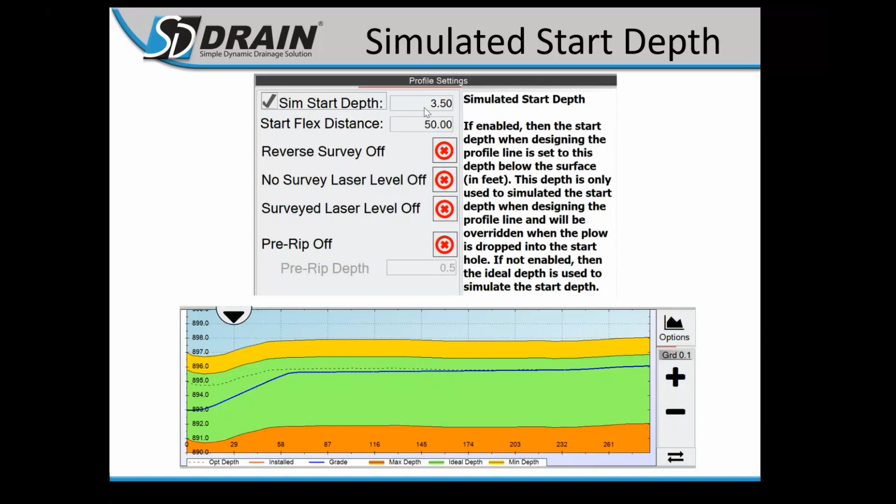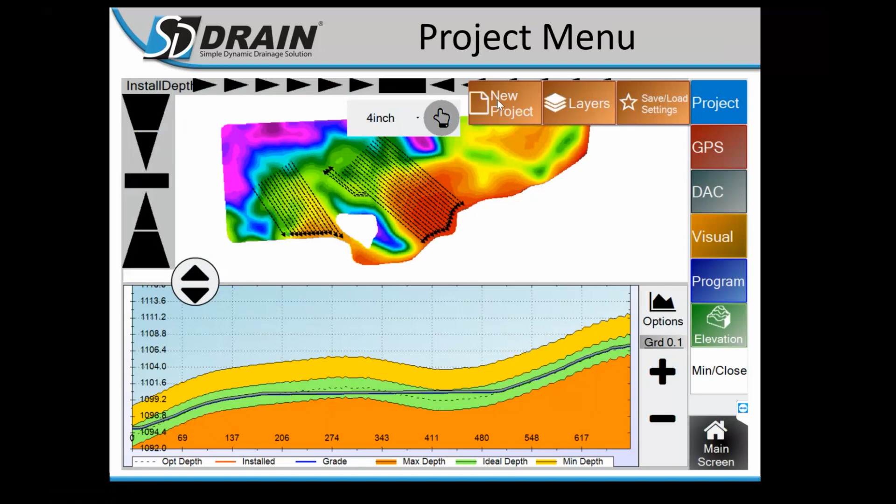Project menu, we went through some of this. We got save, load, settings, layers, and new project. GPS menu, remember benchmarks. We skipped satellites and GPS criteria. You guys, there's nothing here. It's more tech stuff. GPS data for checking your information coming in off your receiver. And then GPS control for your connection information.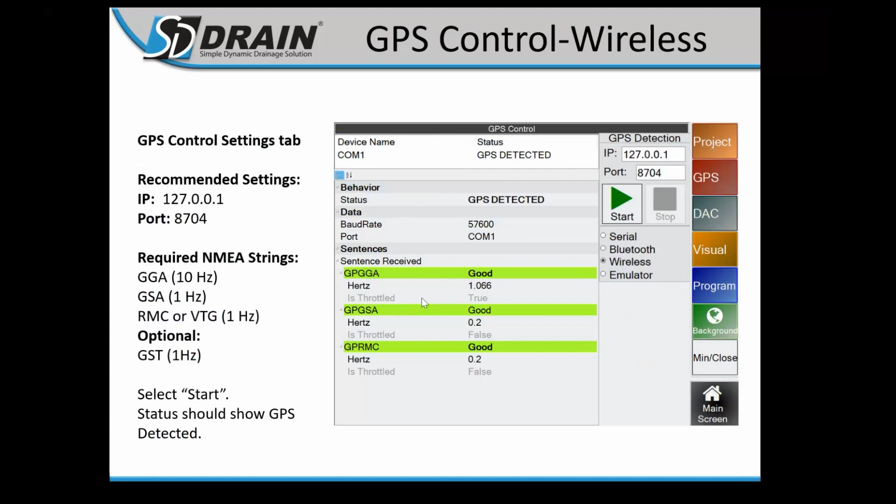Most guys are going to have their GPS getting plugged into the DAC 8000, and the machine control gets plugged into the DAC 8000, and the DAC 8000 gets tucked behind your seat, and then the DAC 8000 wirelessly talks to the PX501 monitor. So we don't need any extra cables except the power cord going to the PX501, your control computer. Yeah, it really cleans that up, with you guys all having these planter monitors, sprayer monitors, and everything. We're just trying to eliminate the cables that go up to the SD drain computer.

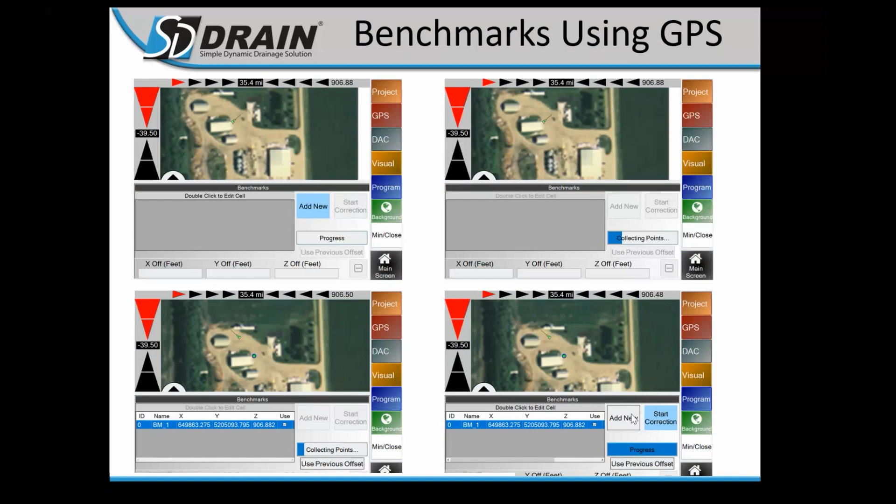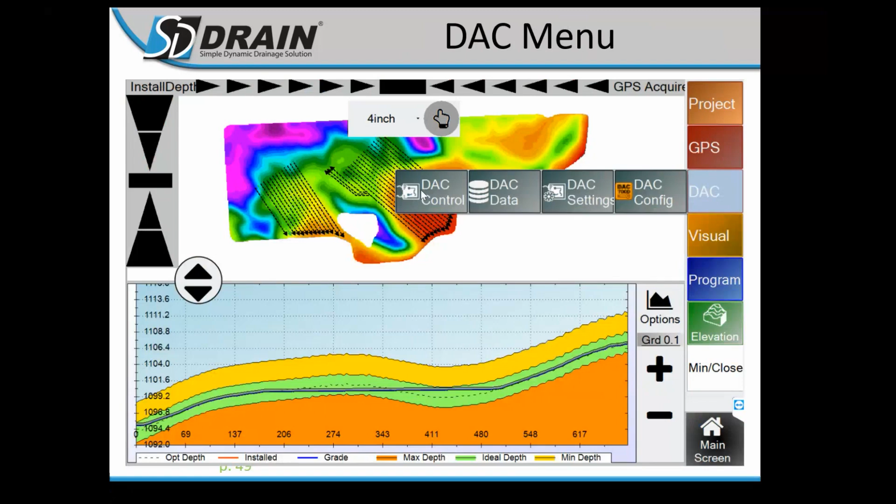DAC menu, we went through DAC config. Oh, we didn't. I'll touch on that later. DAC settings, remember turning on and off your different functions. So your slope sensor, your pitch control, pitch and roll messages, DAC data to view the data coming in off of that sensor, and then DAC control is your connection location, just like GPS control.

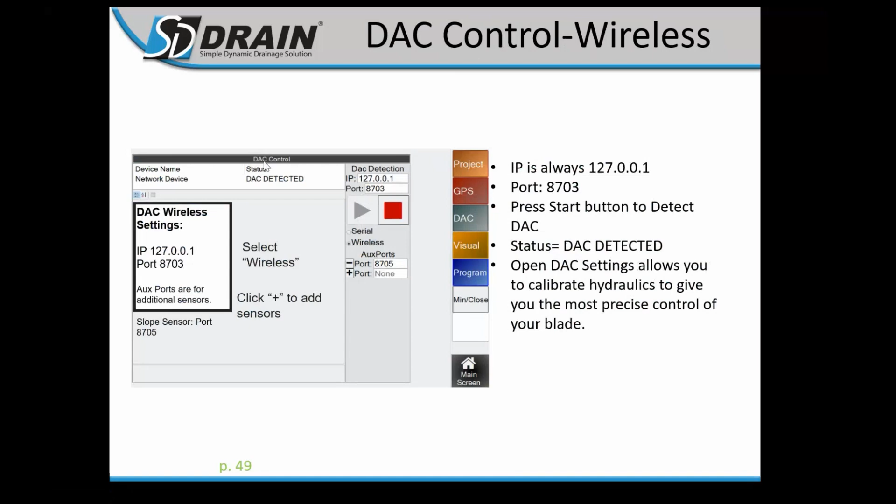And then here are the wireless settings for guys running, like what we just talked about, the clean setup, I'm going to call it, where everything is wireless to the controller. DAC connection, what to look for when you guys are setting up for the year. So when you're plugging in, let's say you were tiling last year, you come back to tile again, you've got some things to look for troubleshooting if things aren't matching up, or just for setup in general.

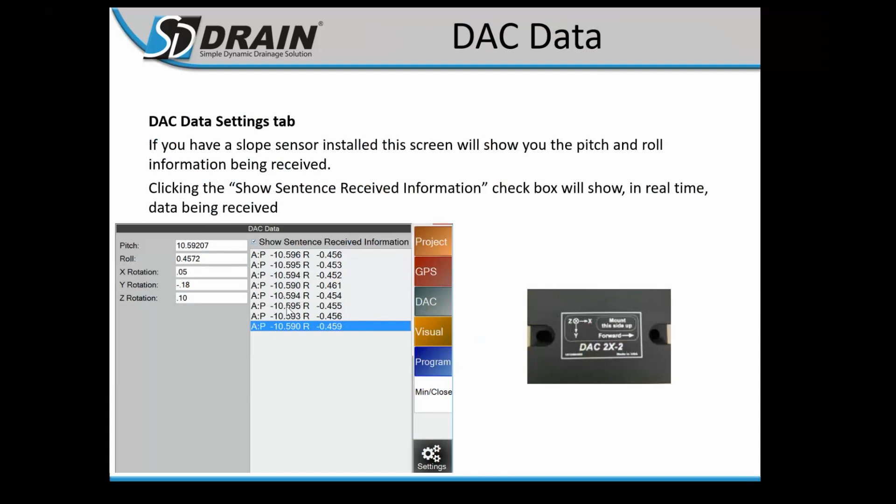DAC data, again, it's all about viewing the data coming in off of your slope sensor. Again, just for informational purposes. Sometimes it's nice for troubleshooting. If you're having slope sensor issues, you might see this is your pitch value, so minus 10 degrees. If this is hopping all over the place and you're sitting still, you might have a bad slope sensor. DAC settings, kind of like what we went through before, just shows you what it looks like if things are going to be checked or unchecked.

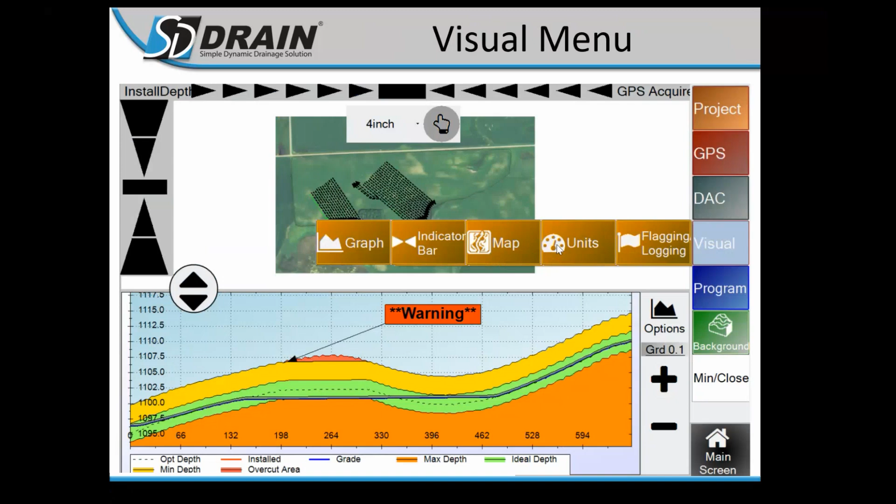Visual menu, this is all about how things are displayed. So as you guys want to change the colors on your side profile, your overhead map, stuff like that, you guys can go through these, flagging and logging, recording GPS, and your units. If you want to display kilometers per hour, you guys can switch those up as well. So here's the graph menu, just showing you what that looks like, changing the different colors. Indicator bar, again, don't change any of those values that we kind of showed here.

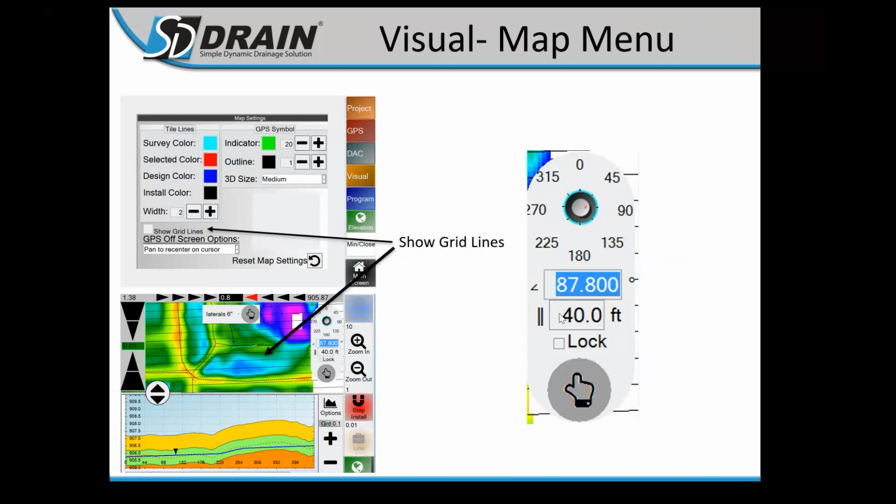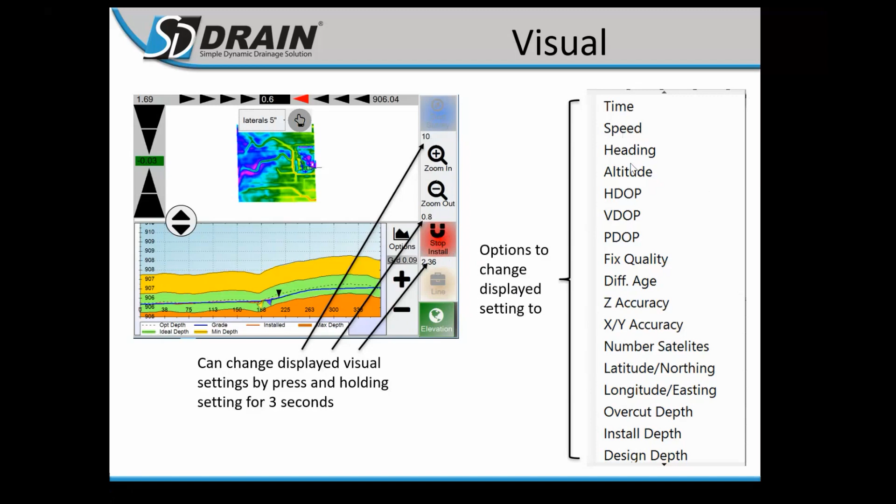So this is something we didn't cover. This would be a visual or something that you guys can change however you want your data to be displayed. If you right click or long press on, so like this 2.36, this is a display bar. This 0.8 is a display bar, and this 10 is a display bar. And I believe it's just like number of satellites, speed, or something, speed that it's set to right now. But if you long press on these, this list will pop up, and then you guys can select the bit of data that you want to see displayed in each of these different windows.

Vertical bar, again, just showing you how far off grade you are from your install. So it'll flash red like this when your plow is going off grade, but it should stay green pretty much the whole time that you're tiling.

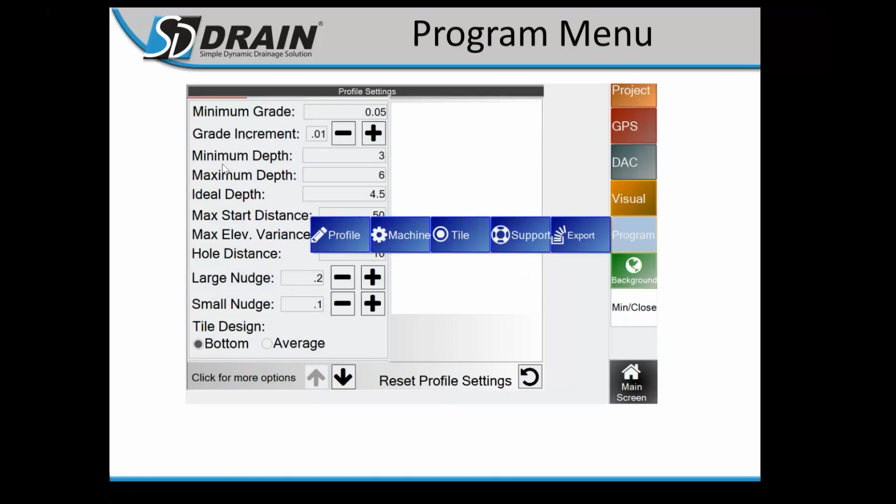And here we kind of talk about those things. Remember that there is a page down. So if you can't find your setting, there is a page down or an arrow down.

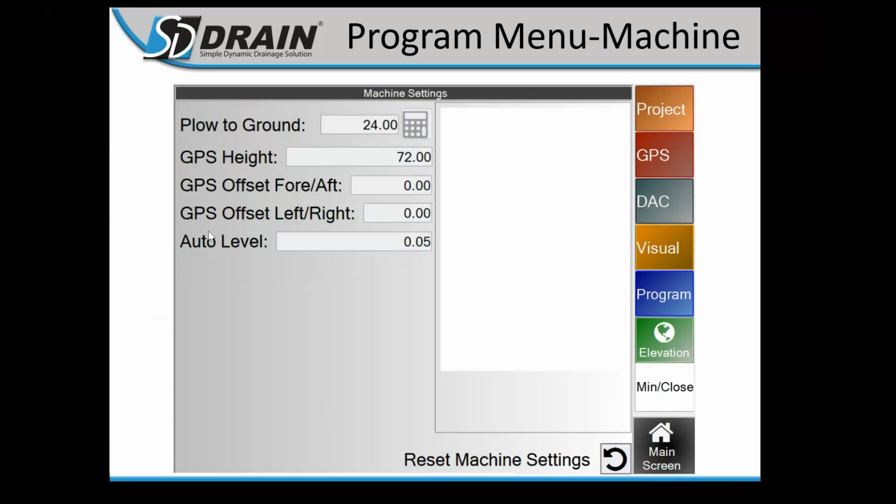Machine, again, all of your measurements. So when you guys are setting up or switching implements, you got to make sure that these are set up correctly for each machine. Tile menu, again, adding the different tile sizes that you guys want to use, hit the plus button, type in all of your information below, and then hit done. And you'll just keep populating whenever you guys add tile, and then you'll get each different tile size in the tile selector box up above here.

Support menu, again, online help, check for updates. And if you want, there's a manual in here as well. But online help and check for updates are going to be the main ones that you guys would use. And these both need internet access to work.

Program menu and export, we went through both of these. Again, project is going to be all of the raw data. Remember, we exported onto Google Earth. And then the report is going to be the PDF version that you guys can print out or just give to your customers.

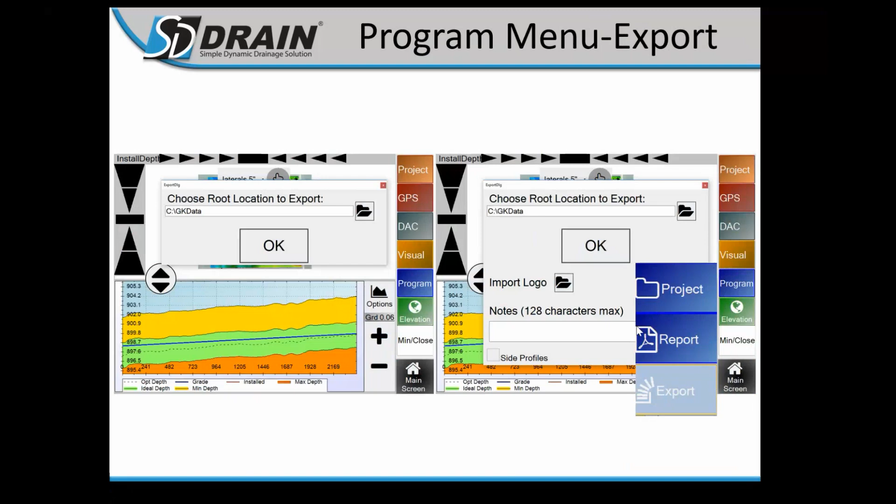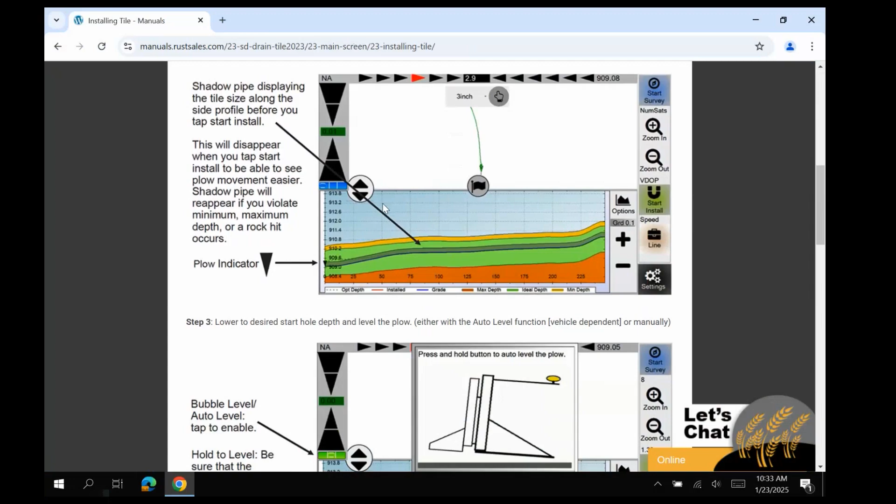And then if you scroll down there, Luke, it can go through and it'll tell you exactly what all these, the main screen, the different buttons are, different areas are, more detailed view on where you may have a specific question about one of the operations of the program. Yeah. So it's kind of handy to have this available. Yep, and it's responsive, so it works well on your mobile phone to take a look at and see what's going on.